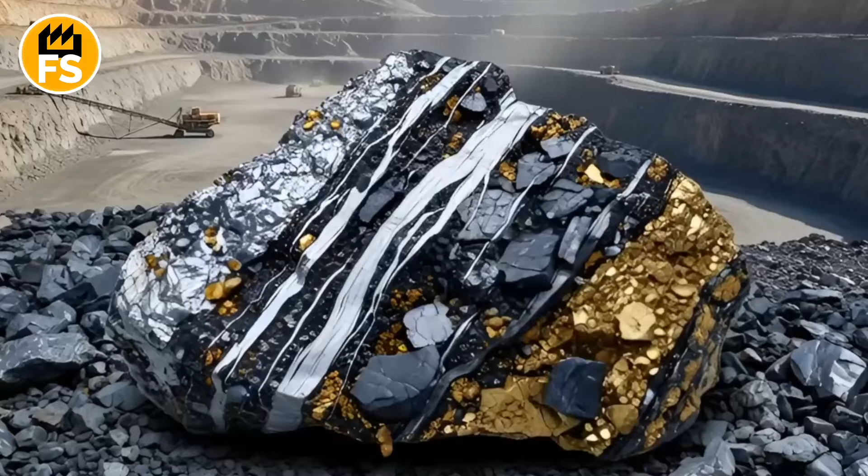What if the metal that still powers most cars on the planet has been quietly poisoning people since the days of the Roman Empire? And we found out too late. Lead built aqueducts, adorned the faces of Egyptians, and today hides in billions of lead-acid batteries, without which cars, elevators, and entire cities would grind to a halt.

We'll descend into mines where explosives shatter rock, trace the journey of galena to red-hot furnaces, and discover why this metal simultaneously saves infrastructure and destroys health. Stick around till the end. One fact about lead will forever change how you look at an ordinary battery.

Okay, let's rewind the clock and dive into a story that began long before the first smartphones and even before the invention of the wheel. How did people even learn about lead, this sneaky, two-faced metal? Truth is, nobody knows exactly who or when first discovered lead, because it wasn't officially discovered by a scientist in a lab like many other elements.

Lead is one of those metals that's just always been around humans, and its history is intertwined with the history of civilizations themselves. Picture this: ancient times, way before people learned to work with iron or even copper. They were searching for interesting stones, clay, anything they could use. And then, in certain places, especially where there are ore deposits, they stumbled upon a really unusual stone.

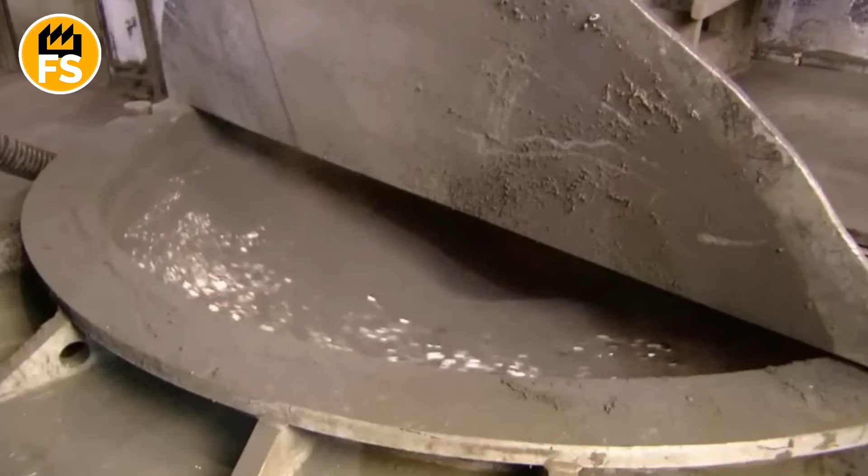Lead has an incredibly low melting point, just 621 degrees Fahrenheit. This means you didn't need some super high-tech furnace to melt it down. A good hot campfire was enough, and if there happened to be lead ore nearby, shiny liquid metal could literally just melt right out of it. The metal in the ore heats up, melts, and starts flowing out of the rock, forming little shiny puddles or droplets. This must have been absolutely mind-blowing to witness.

Out of stone, without any tools, just from fire alone, this shiny, heavy, soft material appears that you can shape with your hands. You could easily flatten it, bend it, cut it even with primitive tools. It wouldn't break like stone. This made it perfect for crafting simple objects.

Archaeological findings show that lead was used as far back as 7,000 or 8,000 years ago, dating to the Neolithic period, for example, in Turkey. People found beads and other small lead objects there. In Mesopotamia, Egypt, and later in Greece and Rome, lead became widespread due to its availability and ease of working with. The Romans built their famous aqueducts and water supply systems using lead pipes. The word plumbing comes from the Latin plumbum, which means lead.

Ancient Egyptians used lead sulfide for eye makeup, while Romans used it for skin lightening and in paints. Nobody back then, of course, suspected this metal was toxic. After all, lead poisoning symptoms were often chronic, developed slowly, and could easily be blamed on bad luck, other illnesses, or curses. People just saw a shiny, useful metal that was easy to work with, and they actively used it, never suspecting that beneath its appeal lurked a treacherous enemy.

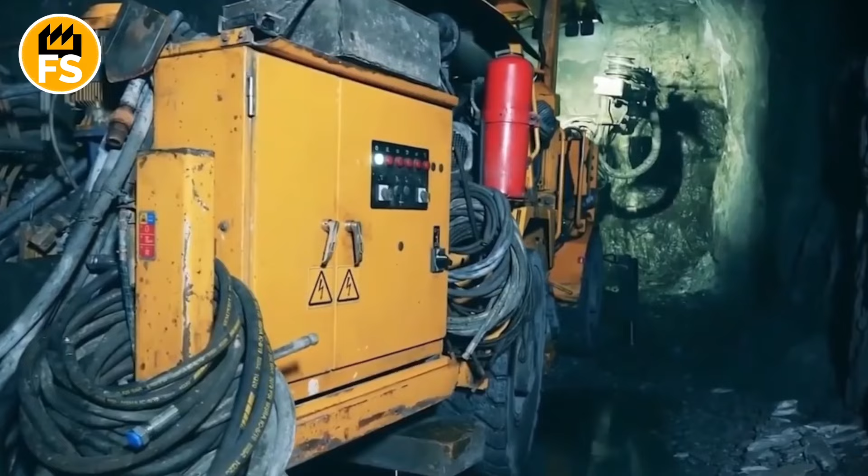Now that we know the grim history of lead's discovery, let's fast forward to our time. Despite all its toxicity and the massive campaign to phase it out, lead is still part of modern industry. But how is it mined now, and where does it hide when we're so desperate to get rid of it? This is a story about precision, control, and the constant battle against its poisonous nature.

Lead, like its neighbor zinc, is rarely found in its pure form. It's mostly extracted from ores, where it exists as lead sulfide, known as galena. And, as you might have already guessed, this anti-hero often shares its deposits with zinc, as well as other valuable metals like silver and copper.

The world's top lead producers are China, Australia, the United States, and Peru, which once again overlaps with the geography of zinc mining. The extraction process starts with locating ore bodies. Geologists, armed with cutting-edge technology, scan the ground and conduct exploratory drilling to find spots where galena concentrations make economic sense. Once a deposit is identified, mining operations begin.

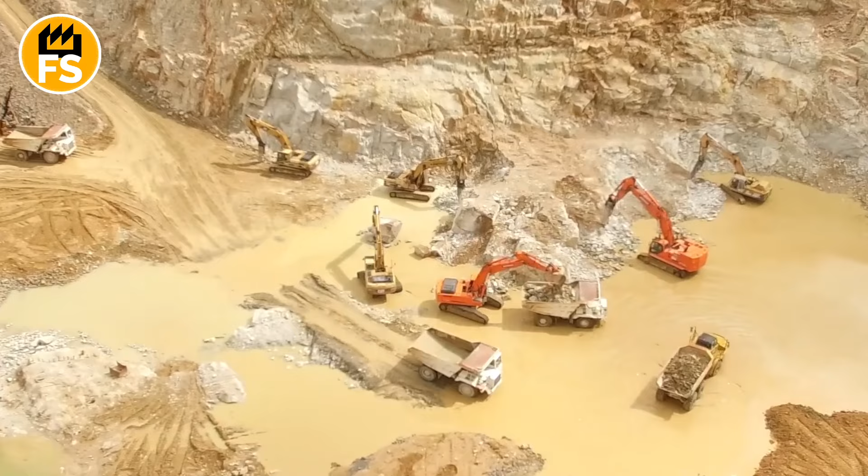This can either be an open pit mine, where massive excavators strip away the top layers of earth, gradually working their way down to the ore, or an underground mine, where miles of tunnels are drilled, penetrating deep into the Earth's crust. In underground mines, drilling rigs are used to create holes in the rock, which are then packed with explosives. After controlled blasts that break up the ore vein, specialized loaders gather the ore fragments and haul them to the hoisting shafts. Ventilation systems run at full capacity, removing dust and pumping fresh air down into the depths.

All the ore is brought to the surface, where it begins its long journey to becoming a metal ingot. After crushing, the flotation process kicks in. This is a chemical-physical method that separates different minerals. The crushed ore is mixed with water and special reagents in massive tanks. These reagents selectively attach to galena particles, making them water repellent. Then air is pumped through the mixture, creating bubbles that the lead mineral particles cling to and rise to the surface as foam. This foam is collected, forming lead concentrate. The waste rock settles at the bottom and gets disposed of.

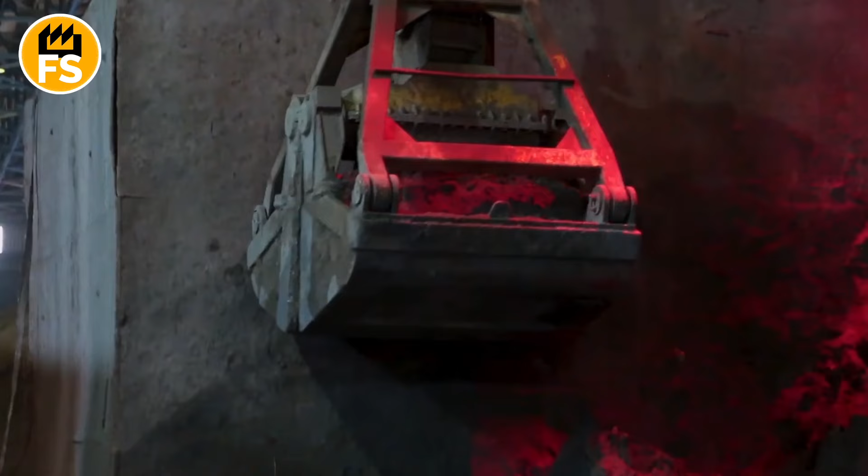Since lead and zinc are often found together, different reagents and flotation cycles can be used to separate them individually, which requires high precision and chemical control. The resulting lead concentrate, now containing a much higher percentage of lead, is shipped to the metallurgical plant. This is where it transforms into pure metal. The most common method is pyrometallurgy, which involves several stages.

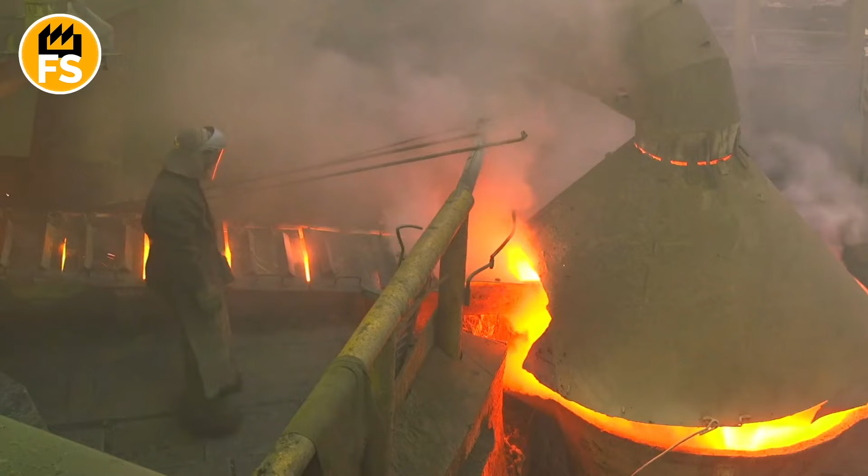First, the concentrate is roasted in special furnaces at high temperatures. This is a calcination process that removes sulfur from galena, converting it into lead oxide. The sulfur that's released as sulfur dioxide gas is carefully captured and converted into sulfuric acid to prevent air pollution. Then the lead oxide is loaded into large blast furnaces, where it's mixed with coke and fluxes. In these furnaces, at temperatures over 2,000 degrees Fahrenheit, a reduction process takes place. The carbon from the coke pulls oxygen away from the lead oxide, releasing liquid metallic lead.

The molten lead, which is extremely heavy, settles to the bottom of the furnace. On top, a layer of slag forms. That's the melted impurities. Molten lead is periodically drained from the furnace, but this isn't pure lead yet. It contains impurities of other metals, such as copper, silver, gold, bismuth, and nickel. That's why lead goes through one more stage, refining. This could be heating to specific temperatures to remove impurities, or electrolytic refining, where electric current separates lead from other metals, achieving very high purity. It's at this stage that valuable byproduct metals like silver and gold, which accumulate in lead ores, are extracted.

So where is all this carefully mined and refined lead being used today, now that we know about its dangers? The biggest consumer of lead, accounting for about 85% of all global consumption, is the production of lead-acid batteries. These are the same batteries that start the engines in nearly every car on the road, and they're also used in uninterruptible power supplies, backup power for telecom networks, and large-scale energy storage systems. In electric vehicles, even though the main battery is lithium-ion, there's often still a small 12-volt lead-acid battery to power the onboard electronics. This is a massive market that keeps demand for lead rock solid.

Every year, over 500,000 bridges are built worldwide, but only a few of them challenge nature and time. To create a giant capable of withstanding thousands of tons of steel, windstorms, and earthquakes, engineers first dive into the very heart of the Earth, drilling the ground to a depth of over 100 meters, studying every layer of rock. Here, under water and mud, the foundation is born, on which the fate of the entire structure depends. How do machines weighing as much as houses place piles with millimeter precision? And what will happen if even one of them shifts? Watch until the end, and you will learn what the engineering elite keeps silent about.

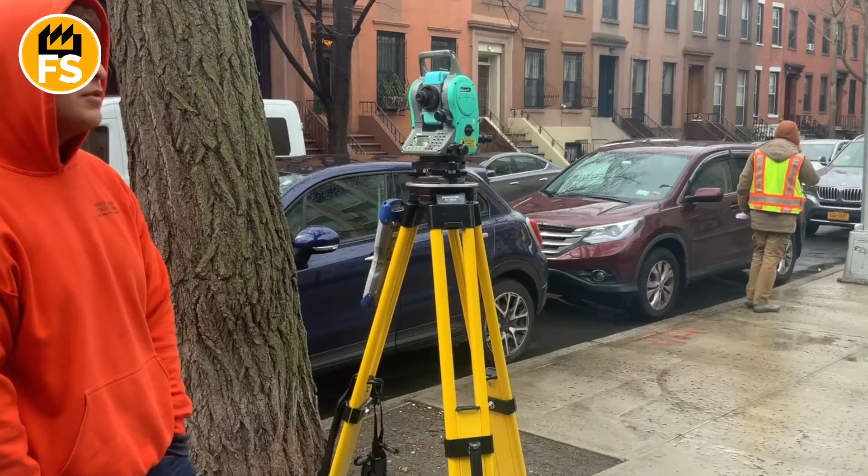The construction of long bridges begins long before the first steel beams or concrete supports appear. It all starts with a site investigation. Engineers analyze the soil, the strength of the current, the level of seismic activity, and the depth of the bottom if it's a river or a bay. Often, special drilling rigs are used to take rock samples at depths of over 300 feet. These data determine the type of the future bridge: suspension, cable stayed, or beam. After this, a three-dimensional model is created.

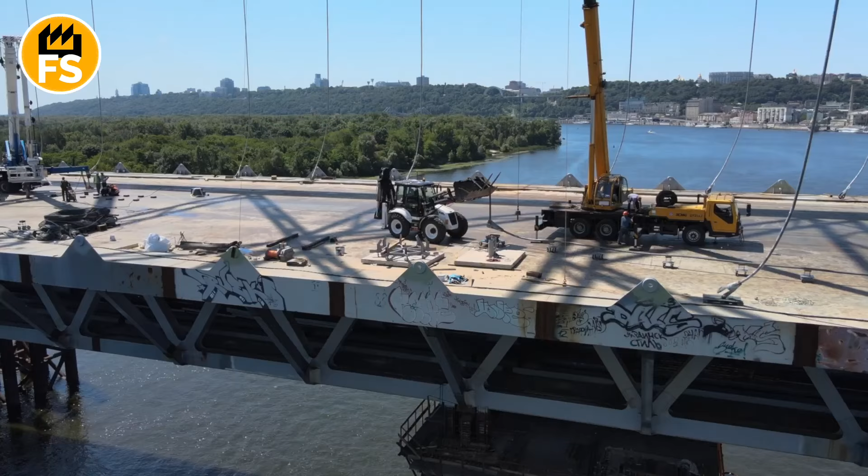It takes everything into account: the load from transport, the force of the wind, temperature fluctuations, and even the possible impact of waves during storms. For bridges longer than half a mile, the permissible error in calculations can be no more than a few millimeters. Otherwise, the structure may lose stability.

When the construction of a bridge moves from drawings to the actual ground, one of the most responsible and complex stages begins: the construction of the foundation, or the pile foundation. It is these structures, hidden under water or earth, that support the weight of the entire bridge: thousands of tons of steel, concrete, transport, and even wind load.

Drilling cranes arrive at the site, giant machines with a long mast, a hydraulic drive, and interchangeable drills. They can reach the height of a 3-story building. Steel piles are brought to the worksite. Usually these are pipes with a diameter from 3 to 6 feet and a length of up to 100 feet. In marshy or marine areas, the piles are even larger, sometimes up to 150 feet.

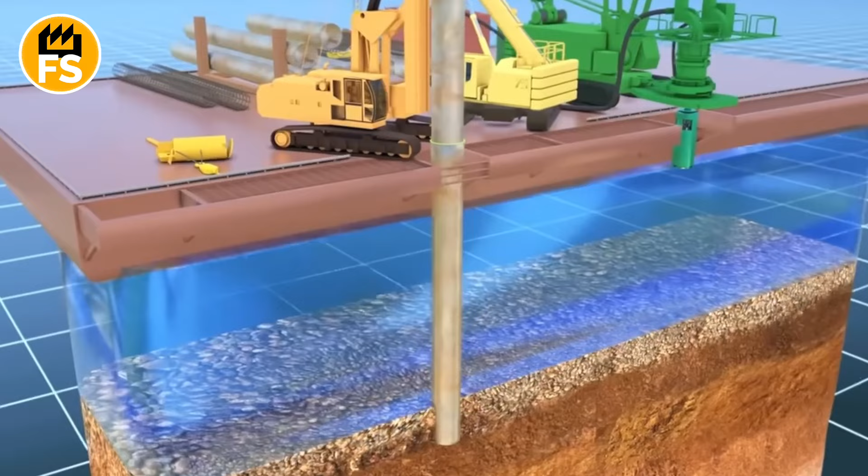The drilling process takes place in stages. The machine is positioned with an accuracy of a few inches. For this, laser and GPS systems are used. Then the operator lowers the drill into the ground. The powerful rotation of the bit crushes the rock, and a hydraulic system pumps out the resulting pulp. In some areas where the soil is unstable, drilling is carried out with the immersion of casing pipes, metal casings that prevent the walls of the well from collapsing.

When the hole reaches the specified depth, a steel pipe, the pile casing, is installed in it. A reinforcing cage is lowered inside, which strengthens the structure, after which concreting under pressure begins. Through a special hose, a concrete mixture is supplied from the bottom up, displacing water or mud. Thus, a dense, air-free mass is formed, which over time hardens into a monolith.

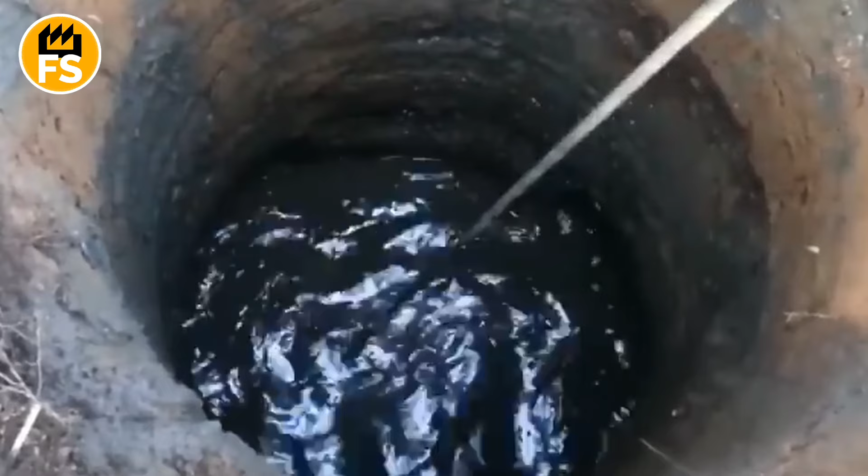In marine areas, floating barges with drilling rigs are used. Divers control the position of the pile underwater, and engineers monitor the process with ultrasonic sensors. In a strong current, drilling is carried out only during periods of calm, when the wave level is minimal.

When the piles are installed, their tops are cut to the required height, and caps are mounted on them: large concrete blocks that unite several piles into one support. After this, pylons or columns are erected on these foundations, which are already visible above the surface.

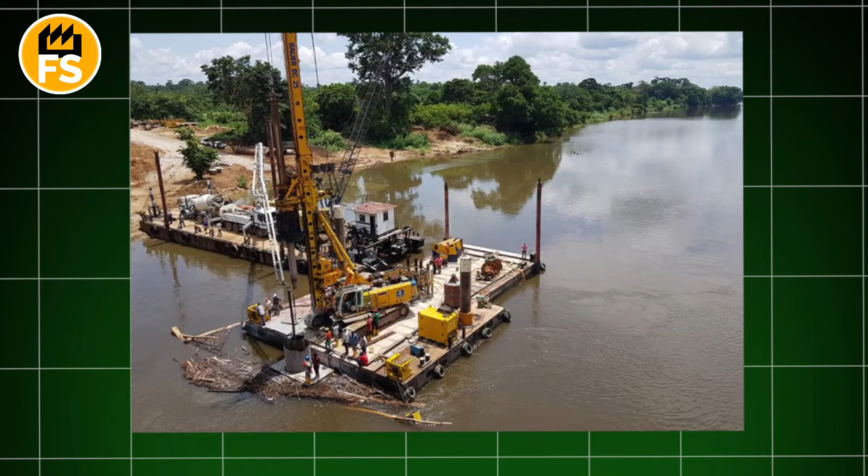On land, temporary sites are simultaneously set up. These are logistics centers where beams, cables, reinforcement, and concrete sections are stored. Often, huge cranes 300 feet high are used here, which can lift blocks weighing over 200 tons.

When the supports are ready, the turn of the superstructure comes. For bridges of great length, two main technologies are used: suspension and cable-stayed. In a suspension bridge, the main load is carried by steel cables. To secure them, two massive towers, pylons, are first erected. Their height can reach 700 feet, as in the Golden Gate Bridge in San Francisco. The towers are assembled in sections, lifting each one with a crane and connecting them with bolts and welding.

After the installation of the pylons, the main cables are stretched between them. This is a complex process that is carried out in stages. Thin steel wires, the thickness of a finger, are stretched one by one by the hundreds, until a main cable several feet thick is formed. Then vertical hangers are attached to these cables. They will hold the roadbed.

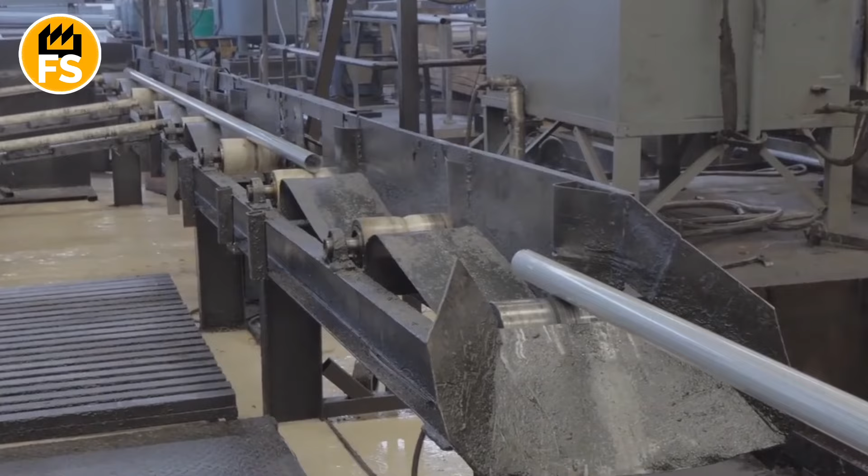In cable-stayed bridges, the main load is transmitted through inclined cables that go directly from the towers to the sections of the roadway. Such cables are made of steel strands with a polymer coating, capable of withstanding a load of over 500 tons. They are installed with the help of hydraulic winches, which precisely regulate the tension.

The installation of the span sections is one of the most impressive stages in the construction of a bridge, when the giant engineering structure literally begins to connect the shores. Each section is a finished fragment of the road, made of high-strength concrete or steel at a specialized plant. There they are formed in giant molds, reinforced with steel bars, treated in thermal chambers for rapid strength gain, and then marked and checked for accuracy with a laser system. After this, these blocks are transported to the construction site.

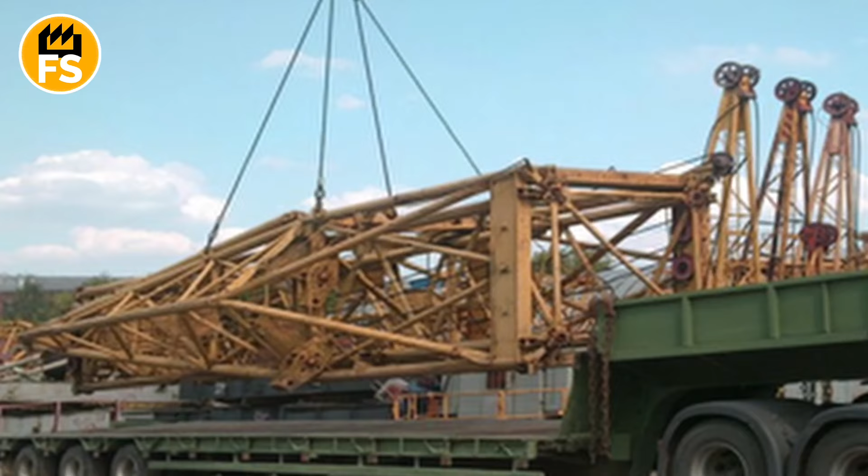If the bridge is laid across a body of water, the sections are delivered by barges, floating platforms capable of withstanding hundreds of tons. On land, they are transported by multi-axle trailers with dozens of wheels, which evenly distribute the weight. The movement of such columns is usually accompanied by police, as each block can be from 100 to 400 tons and over 100 feet long.

At the construction site, floating cranes or lifters are already waiting. These are powerful lifting systems capable of lifting a load of over 500 tons. Most often, such cranes are mounted on pontoons or mobile platforms that can accurately maneuver over the water. During the lift, the crane operator coordinates his actions with the engineers who are on the bridge supports. Every movement is a matter of inch precision, as the section needs not just to be lifted, but placed perfectly in the design position.

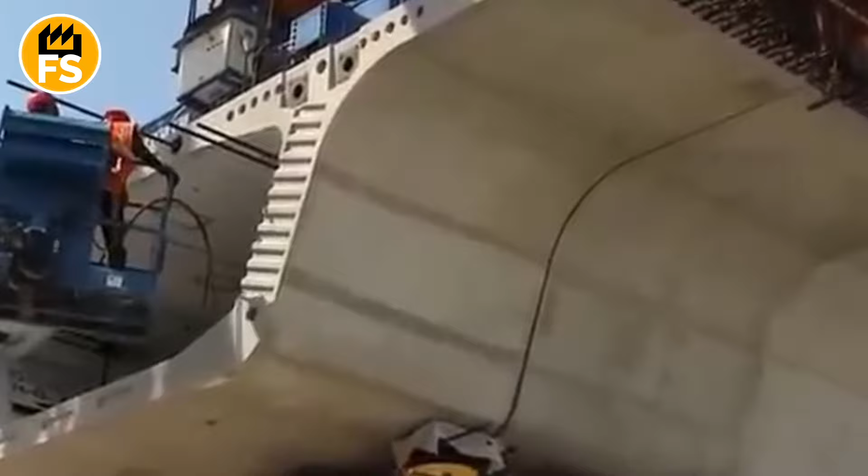When the block is suspended above the supports, it is slowly lowered. Workers fix the position with the help of special guide pins and laser marks. Then dampers and high-strength connecting bolts are installed in the joints of the sections. It is important that the sections fit together without the slightest misalignment. Even an error of half an inch can cause uneven load.

Next, the joints are filled with cement mortar under pressure, which fills all the voids and forms a monolithic connection. In some types of bridges, post-tensioning cables are used, steel strands that are threaded through the internal channels of the sections and tensioned with hydraulic jacks, providing additional strength.

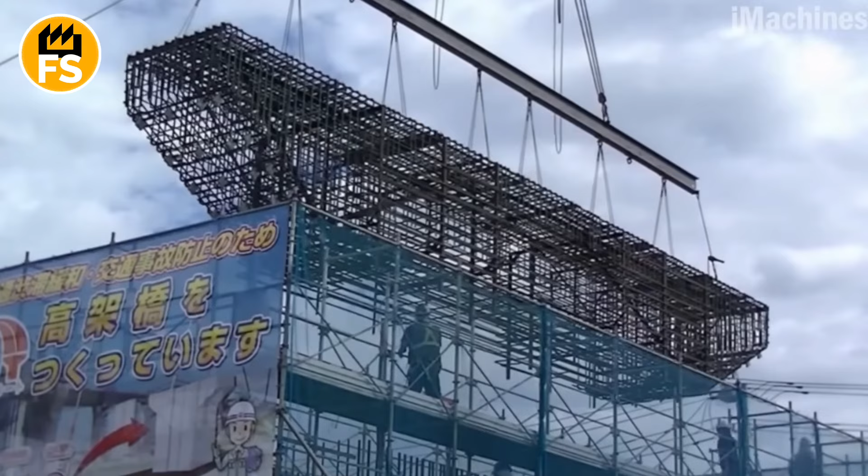If the bridge is being built over the sea, the installation is even more complicated. Barges with sections are tied to positions with an accuracy of a few feet using GPS, and the lifting takes place only in calm seas. Often at night, when the wind is weaker and the waves are minimal, the crane slowly lifts a section. The process can take several hours.

From the side, it looks like a giant aerial operation. A steel or concrete slab, as huge as a two-story building, smoothly rises above the water or a gorge, moving with an accuracy of a few centimeters. When it is fixed between the supports, the bridge literally grows. Another span, another few tens of feet of road, which bring it closer to completion.

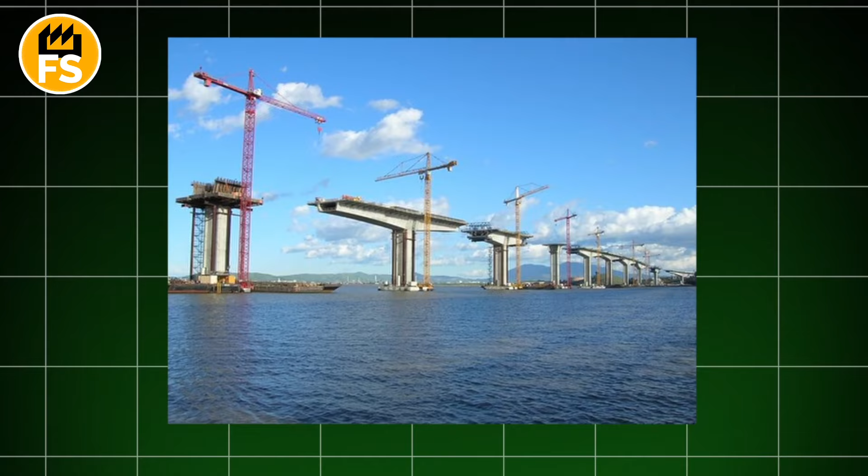In parallel with the installation of the roadbed, communications are laid: lighting systems, communication wires, pipes for rainwater drainage. Most bridges have sensors that measure vibrations, temperature, the tension of the cables, and even the concentration of salts in the air. These data are constantly transmitted to a control center.

When the main structure is completed, the road surface work begins. The surface consists of several layers. The first layer is a special anti-corrosion compound that protects the concrete and metal. Next, waterproofing is applied, then several layers of asphalt or polymer concrete, about 4 inches thick. For suspension bridges, lighter materials are used to reduce the load.

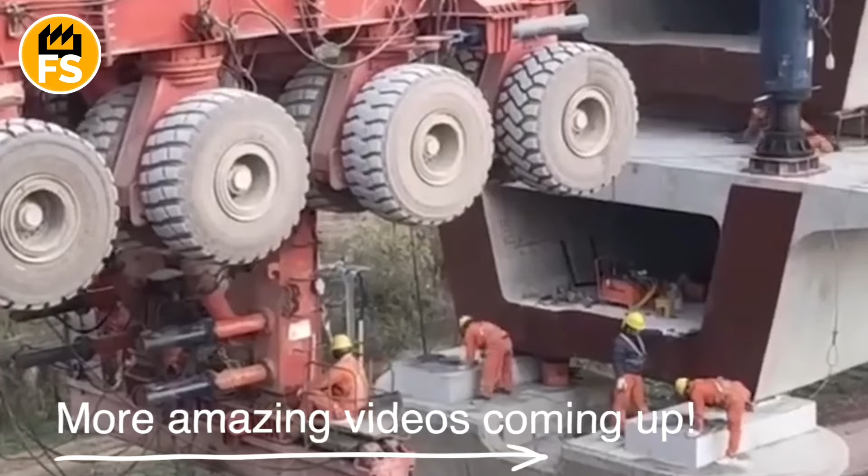The final stage is the installation of railings, noise barriers, and the painting of steel elements. The painting has not only an aesthetic function, it also protects the metal from corrosion. For bridges over the sea, paints with the addition of zinc are used, which create a stable protective layer.

After the completion of all work, the bridge undergoes a series of tests. Special trucks are loaded onto it to check how the structure reacts to weight. Vibration tests are also conducted. Engineers check how the bridge behaves during wind or the movement of trains and cars. If the indicators meet the standards, the object is put into operation.

Imagine, you throw away an old washing machine, not even suspecting that it could live another life. But where does your appliance actually end up after it's been taken away at a discount or for free? Is it really recycled? Or just buried under a layer of earth? Behind every seemingly dead machine stands a whole industry of destruction, separation, and material revival.

Giant shredders, magnetic separators, eddy current fields that separate aluminum from steel with centimeter precision. And at the end of the video, you'll learn something that's not mentioned in any trade-in advertisement. What really happens to your old appliance after it disappears from your home?

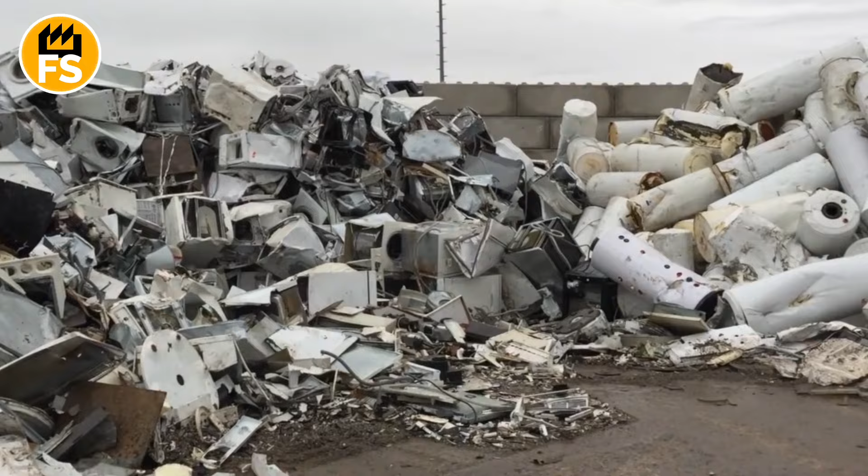Many major brands and electronic stores offer a trade-in program or free removal of old appliances when you buy a new one. For example, in the United States, companies like Whirlpool, LG, and Samsung have such programs, and in Europe, initiatives like the Waste Electrical and Electronic Equipment Directive are in place. The terms can vary. Some companies simply take the appliance, while others offer a discount on a new purchase.

Whirlpool in the United States might offer a $50 to $100 discount on a new appliance for an old washing machine. LG and Samsung sometimes offer $100 or $200 as part of promotional programs. In Europe, some programs allow you to get up to 10% off a new appliance. But more often than not, the discounts aren't very large. Most companies view this as an environmental initiative rather than a way to attract customers.

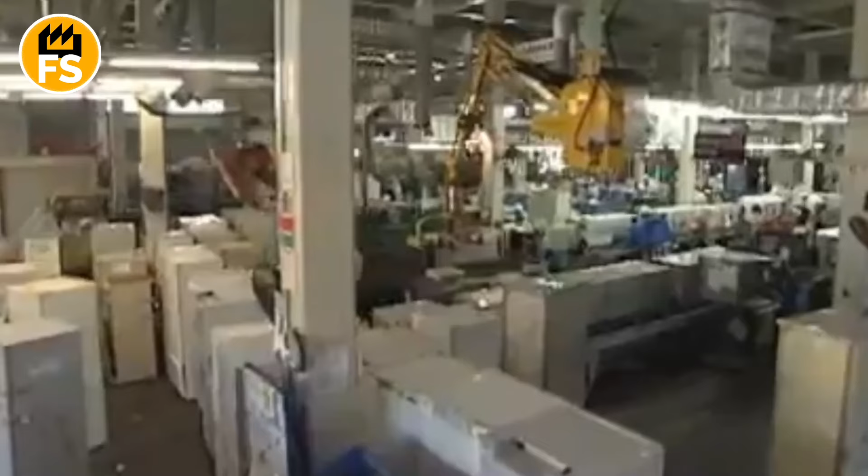In many cities, there are electronic waste collection centers where citizens can bring old washing machines themselves. Often these centers work in cooperation with municipalities or private companies. In some countries, including Germany, the United Kingdom, and the United States, there are municipal services that provide collection services for large electrical appliances. For example, in New York City, you can order a free pickup through the NYC Safe

Disposal program. Some companies are involved in secondary metal recycling, so they may buy the washing machine or take it for free. They send the appliance for dismantling, where they extract metal, electronics, and plastic.

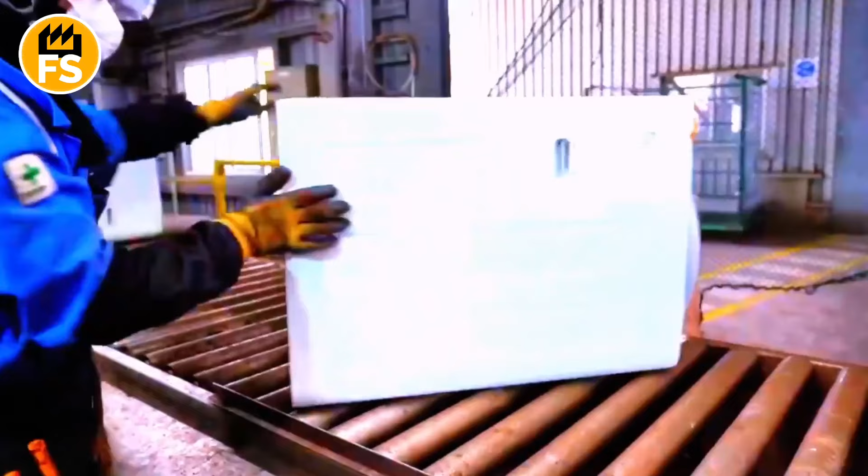First, the machines are sorted into categories: working, partially working, and non-working. Working ones can be repaired and resold, while those beyond repair go to dismantling. Dismantling begins with removing the outer panels, doors, and drum. The motors, electronics, wires, and pumps are separated, as they can be reused or melted down.

Metals are sorted separately: stainless steel, aluminum, and copper. Plastic parts are also sent for secondary recycling. This process can be done both manually and with the help of special automated lines that shred the casing and separate the materials using magnets and air separators.

Automated lines for recycling washing machines consist of several stages, each responsible for separating different materials. First, the machines are fed onto a conveyor belt, where they are shredded by powerful rotary shredders. The blades of these shredders are capable of tearing metal and plastic casings into fragments ranging from 3 to 10 centimeters in size. After shredding, the materials pass through magnetic separators.

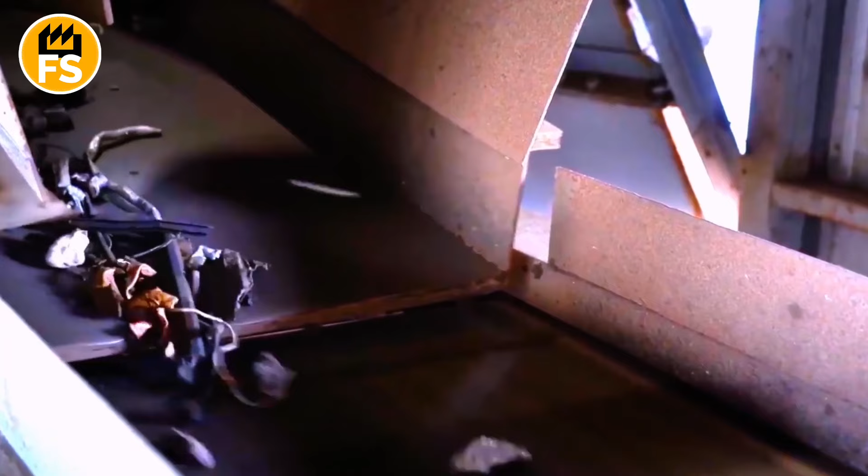They attract ferromagnetic metals, such as steel and cast iron, separating them from the rest of the components. Next, an eddy current separator comes into play, which uses a magnetic field to push out non-ferrous metals, including aluminum and copper.

Plastic and light materials are separated using air separators. Powerful streams of air lift the light particles up, sending them into special containers, while the heavier ones remain on the conveyor. At the end of the sorting line, the remaining materials are additionally checked with optical scanners that analyze their composition and direct them to the appropriate sections for further processing or disposal.

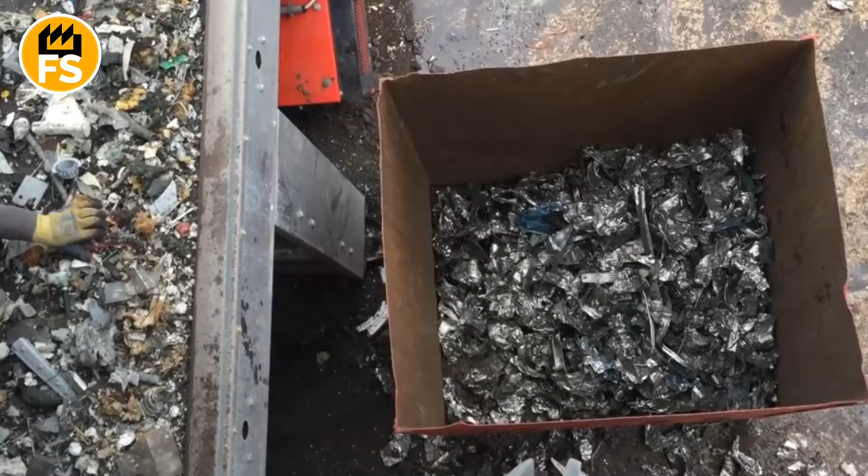After the materials have been sorted using air separators and optical scanners, they go to separate processing lines. Plastic, metal, glass, and other materials are processed for further use or recycling.

The remaining metals, such as steel parts, are sent to metallurgical enterprises for remelting and further use in the production of new goods. Magnetic separators effectively extract iron and steel, which are sent for remelting. Plastic parts are shredded and pressed into briquettes. These briquettes can be sent to specialized enterprises for the production of new plastic products, or for use as secondary raw materials for new technical devices.

If the washing machine has glass elements, for example, doors or windows, they are thoroughly cleaned of any contaminants and can be melted down to produce new glass.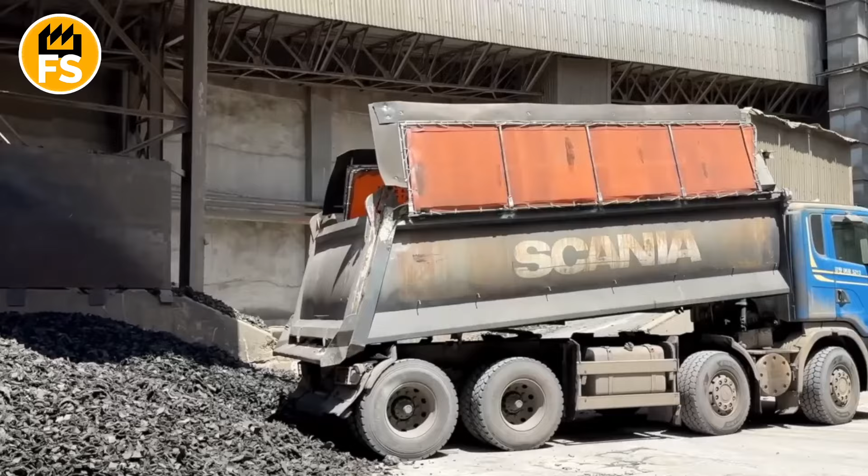The remaining materials that are not recyclable, for example, certain types of rubber or mixtures of materials, are sent for disposal or burial at specialized landfills. Such sorting and recycling lines significantly reduce the amount of waste that ends up in landfills and help return raw materials to the economic cycle.

In some cases, for particularly complex materials, additional technologies are used, such as thermal decomposition or chemical treatment. They are used for materials that cannot be simply separated by mechanical methods, or that require additional processing to prevent contamination or harmful emissions. For example, some plastic components that contain a combination of materials, such as plastic with metal inserts or rubber parts. Such materials may not be subject to simple sorting and require special processing to separate the components.

Often, rubber elements, especially with the addition of chemical compounds, are not effectively recyclable due to their complex structure. For such materials, thermal decomposition or other chemical processes may be used to break them down into simpler components that can be reused or disposed of.

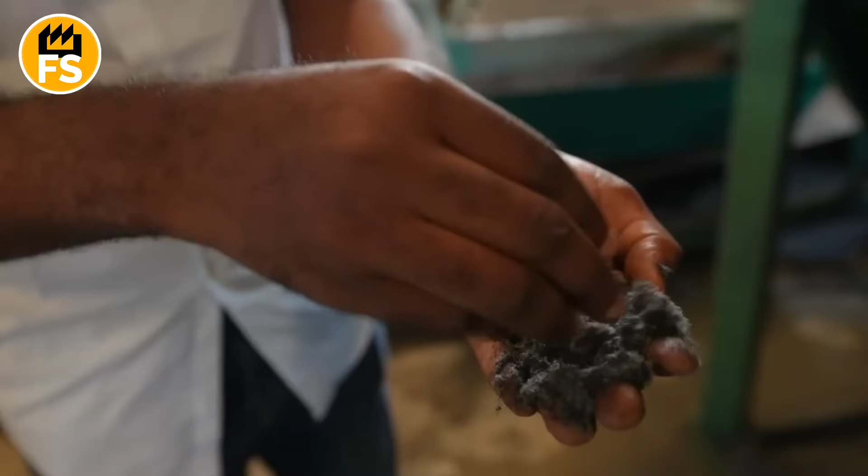In some cases, when an appliance contains toxic substances, for example, mercury in old relays, batteries, or lighting devices, such materials must be processed by special methods. This can be a chemical process that neutralizes harmful components or isolates them for further safe disposal.

Polyurethane or polyester materials, which are often found in wire insulation or in various components of household appliances, can be subjected to thermal decomposition to separate them into simpler components that can be recycled.

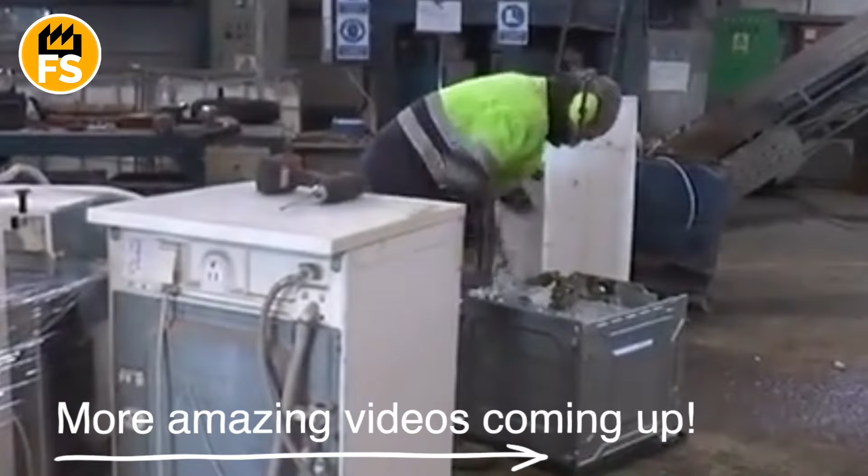In cases where washing machines or other appliances contain complex composite materials that have several layers of different substances, for example, plastic with metal or fibrous components, special processing may be required to separate these layers and for the subsequent recycling of each of them. In general, such technologies are used to ensure maximum efficiency of disposal and to reduce the negative impact on the environment, as improperly processed materials can lead to pollution or the leakage of dangerous substances.

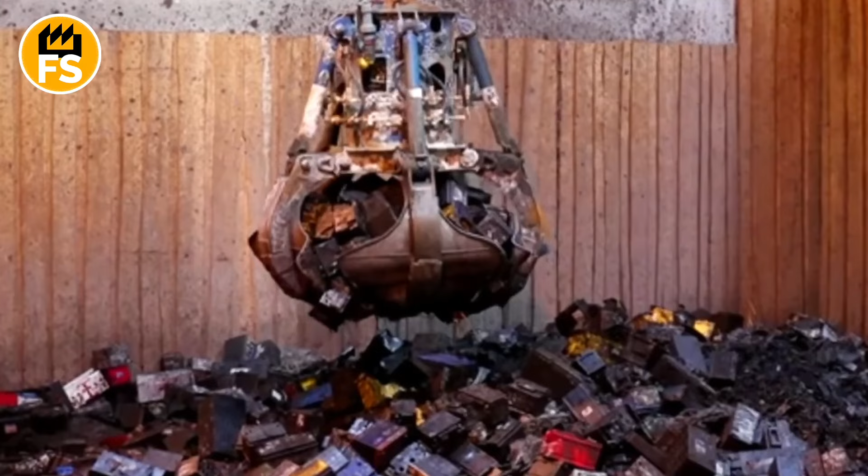Every year, over 50 million tons of batteries are discarded worldwide, from small AA batteries to giant electric vehicle batteries. Imagine a mountain of metal reaching the size of Mount Everest, filled with toxic substances. But now, part of this mountain gets a second life. Behind the thick walls of factories, old batteries are put into shredders where steel blades tear them apart. They are frozen with liquid nitrogen and turned into a black powder that will once again become lithium or cobalt. Watch until the end. You will see how a new future for energy is born from waste.

Battery collection starts with people. Private individuals turn in batteries from phones and laptops. Car service centers, batteries from electric vehicles, and also businesses that use a lot of equipment. Collection points are in electronic stores, supermarkets, or specialized collection centers. Here, everything is as manual as possible. People bring batteries, and staff or volunteers accept and record them.

Old batteries from factories or car service centers are delivered by trucks to large collection centers. Special battery containers have sensors that determine the fill level. When a container is almost full, a signal is sent to the collection company. Some companies use drones to check the fill level of large containers in remote locations.

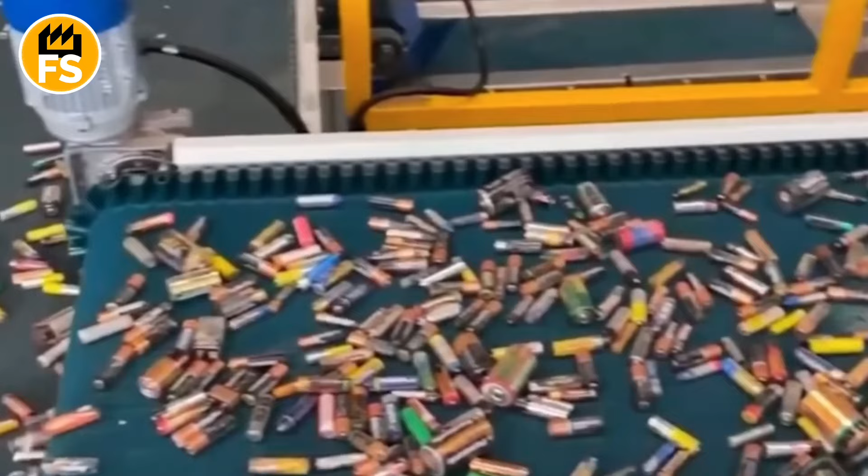Batteries are sorted by type by people and machines, because batteries come in different types: lithium-ion, nickel metal hydride, lead acid, and so on. They cannot be mixed during recycling. At small collection points, for example, in cities, batteries are sorted manually by workers. They rely on markings, labels, and appearance such as shape and case color. Small batteries from smartphones or laptops go in one direction, and large batteries from electric vehicles in another.

At large enterprises, automatic sorting lines are in operation. Machines scan batteries by size, weight, and the type of metals they contain. X-ray analysis or spectroscopy is used to determine exactly which battery is in front of the machine. After scanning, the batteries move along a conveyor to different bins, where they await the next stage.

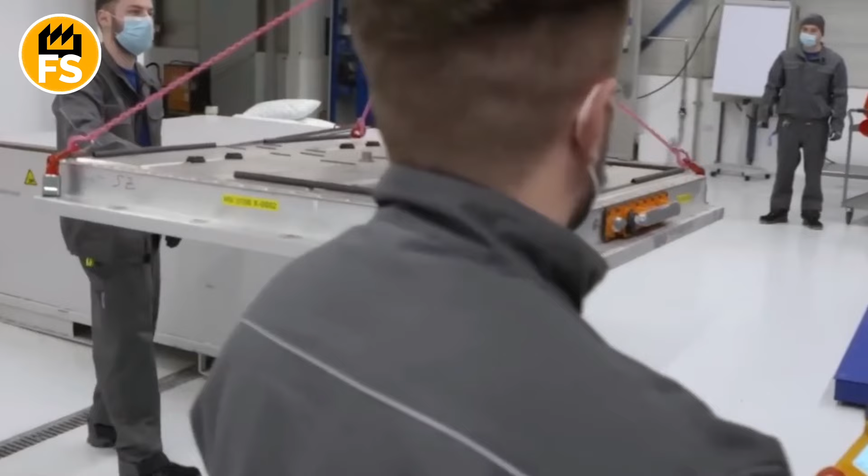Even at automated factories, people are present. Operators check whether the machines are sorting the batteries correctly. If a problem arises, for example, a torn battery case or a missing label, people intervene and sort manually. Batteries from electric vehicles or solar stations are too large for automatic lines. This is where robots come into play, helping to disassemble these giant blocks into smaller sections. Then they are sorted by material.

No matter how much machines do, people are still the most important in the sorting process. These are mainly the workers at collection points and the operators of sorting lines. Specialists assess damaged batteries manually because machines cannot yet recognize all defects. Machines work faster, but for now, they can't do without people. Ultimately, every correctly sorted battery is a chance to recover rare earth metals and reduce environmental harm.

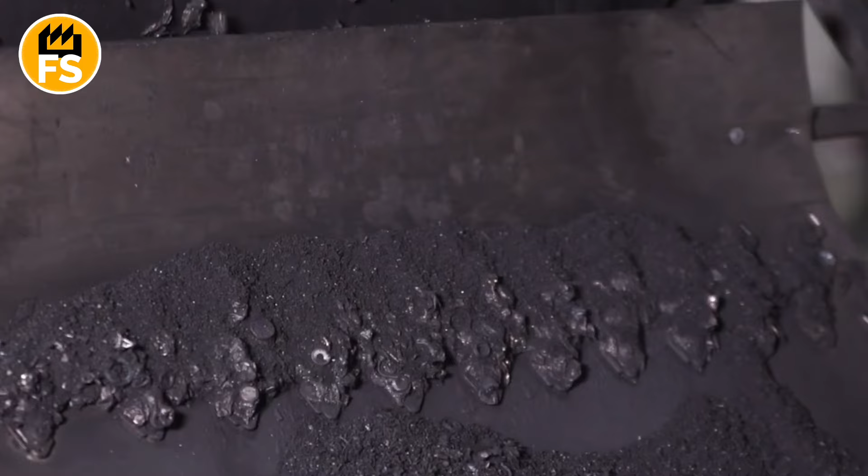Next, the batteries need to be shredded. They enter real metal jaws. The batteries are loaded into a machine that looks like a huge shredder, equipped with steel blades. The blades are so powerful that they can even shred the body of an electric car. Metal chaos ensues. The sound of tearing, grinding, and cracking. The batteries are literally ripped to shreds.

Since the batteries can be charged, they first undergo freezing in liquid nitrogen. This cools the metals and reduces the risk of ignition. Some shredders operate in sealed chambers with inert gases to exclude contact with oxygen. There is also a more spectacular option. In some places, a controlled current is first used for ignition. The battery literally burns out, leaving only the metals. The batteries are shredded into pieces from a few centimeters to a crumb, depending on the type of shredder.

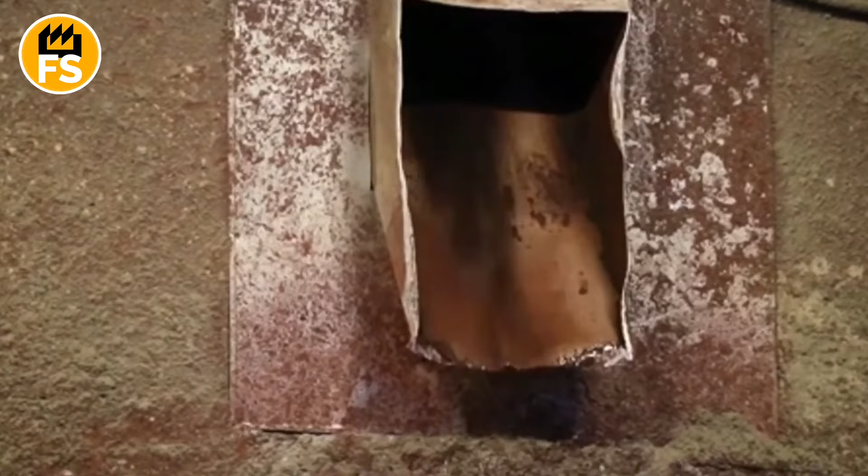The blades rotate at a speed of over 2,000 revolutions per minute, and metal fragments fly in all directions with a clang inside a protected chamber. The shredded pieces pass through magnetic separators, which with filigree precision extract ferromagnetic metals, for example, nickel or cobalt. Fragments of other materials continue their journey along the conveyor.

A fine black powder, known as black mass, settles in special containers. This is where the treasures are hidden: lithium, cobalt, manganese. Machines literally suck up the powder with dust collectors to gather even the microparticles. Residues that are not suitable for recycling, meaning plastic and traces of electrolytes, are washed away with special streams of liquid. At this stage, hydraulic crushers are used, which turn the remnants into a slurry that is easy to filter.

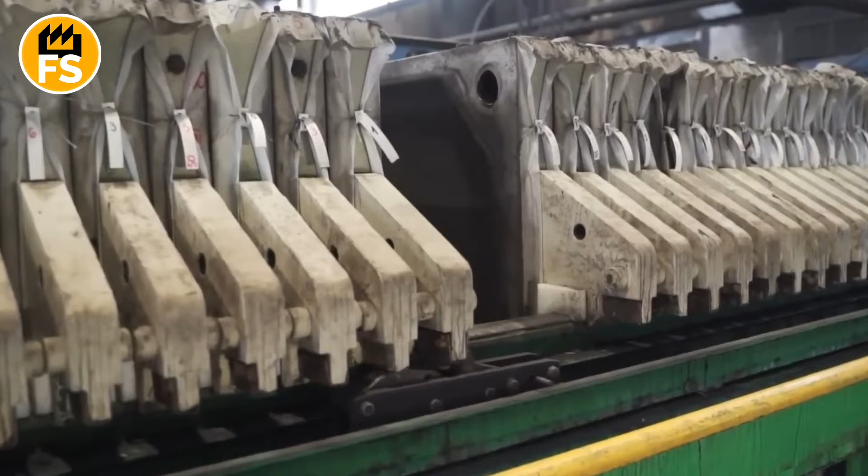Engineers monitor the condition of the shredders and the temperature level inside the chambers. Specialists work with the results of the shredding. They check whether all the metals have been separated and whether any extra impurities remain. If a battery is charged and has defects, it can literally explode during shredding. But the system controls this. The explosion is extinguished by gases, and the process does not stop.

After the batteries are shredded and that precious black powder is obtained, science in action, as they say, begins. The metals that seem to be hidden forever are extracted using two main methods: hydrometallurgy and pyrometallurgy. And although this may sound a bit technical, the processes themselves are extremely interesting. So what does it look like?

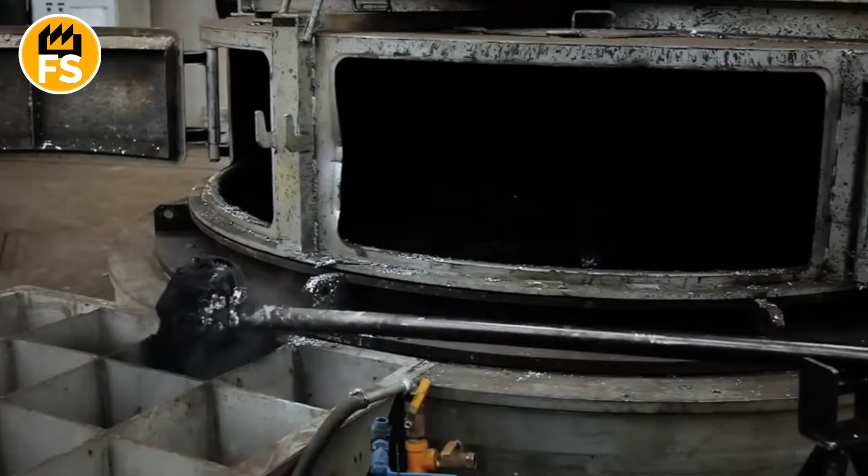Battery fragments are immersed in special acid solutions. There are huge tanks where a yellowish-green liquid is bubbling. This could be sulfuric or hydrochloric acid. During immersion, a reaction occurs. Lithium, cobalt, nickel, and other metals literally dissolve in this soup. To extract the desired metal, a clever trick is used: ion extraction. Special reagents, for example, organic compounds, are added to the liquid, which capture a specific metal, like a magnet. As a result, each metal settles into a separate layer.

When the metals are separated, they are precipitated in the form of salts or hydroxides. They look like small white or colored crystals. For example, lithium precipitates as lithium carbonate, a powder that looks like fine sugar. Cobalt becomes a bright blue precipitate, and nickel, a pale green one.

If hydrometallurgy is a gentle approach, then pyrometallurgy is more like shock therapy for metals. Here, everything literally burns and melts. The black mass is loaded into a huge arc furnace, where the temperature reaches almost 3,000 degrees Fahrenheit. The metals melt into a liquid mass, and the plastic and other residues simply burn up. The metals stratify, like oil and water, but at the temperature of molten lava.

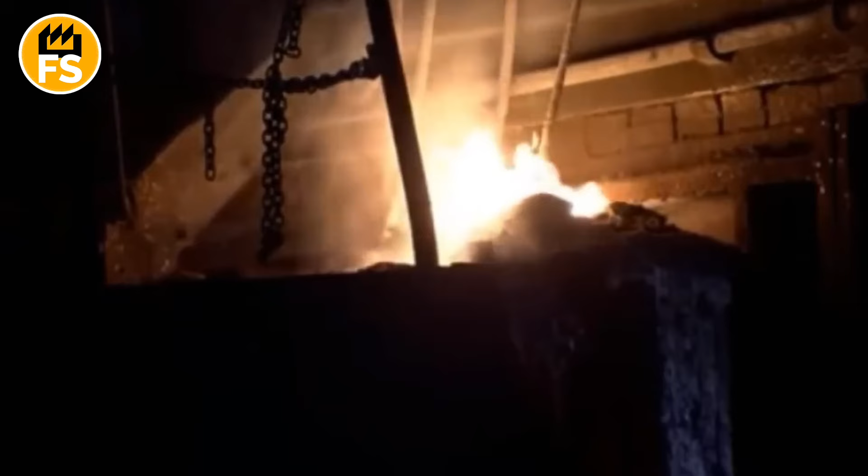Several layers form in the furnace. Heavy metals, meaning cobalt and nickel, settle to the bottom, while lithium remains in the slag. This is the upper, lighter layer. Then this slag is broken up and processed separately to extract the lithium. After cooling, the metals take the form of small ingots, shiny, smooth, and ready for reuse.

The cooling after the pyrometallurgical process usually happens in a controlled manner. After all, if you just let the molten metals cool on their own, it could take hours and sometimes even days. In addition, such cooling can create an uneven metal structure. This will affect the quality of the final product. Therefore, they are usually cooled in special chambers, where the cooling rate can be regulated.

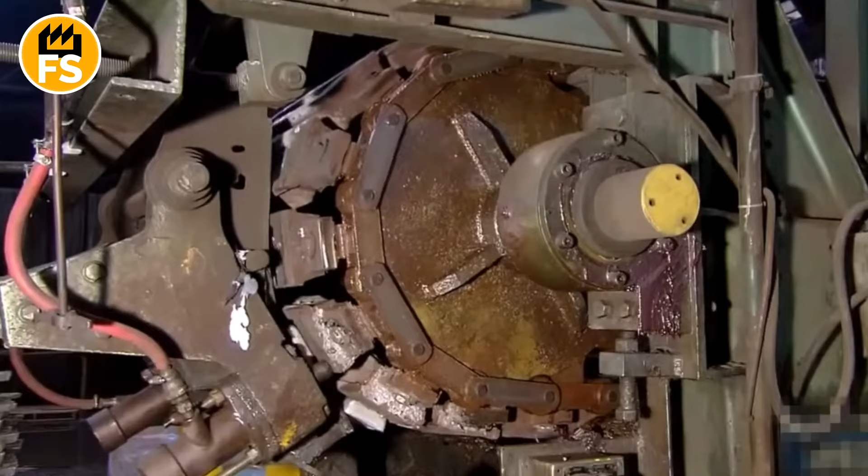If the controlled cooling is air-based, the ingots are left on a conveyor under powerful fans. It's like a giant hairdryer that quickly cools the metal surface. If it's water cooling, for a faster process, the metal ingots can be immersed in a bath of water or special liquids. This is a huge tank where the red-hot ingot, upon entering the water, releases clouds of steam. It looks quite spectacular.

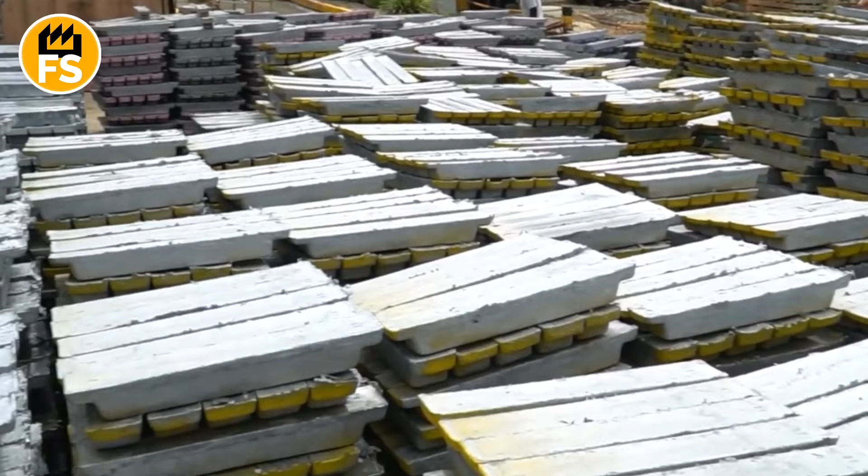Sometimes there is combined cooling. This is when some stages begin with air cooling and then are completed with water cooling to reduce stress in the metal. Controlled cooling ensures a uniform structure of the metals, which is critically important for their reuse in batteries. This reduces cracks or defects that can arise from sharp temperature changes.

The obtained lithium is used to create new batteries, those that will charge electric cars or even your phones. Nickel can become part of turbines that generate energy from wind, and cobalt, an important component of medical equipment. So we are literally closing the loop. Old batteries give life to new technologies.

Discarded batteries can turn into a real environmental disaster. First, they contain toxic substances that pollute the soil and water. Second, the mining of new rare earth metals not only depletes natural resources, but also harms the environment. Recycling solves both of these problems.

You know what else is cool? The more batteries we recycle, the less we depend on mining new materials. This is a direct path to sustainable development.

Despite the popularity of lithium, only 1% of this metal is currently recycled. The main reason is the high cost and complexity of the process. But researchers are developing new technologies that could change the situation in the coming years. Interestingly, even now, electric car manufacturers like Tesla, Volkswagen, and BMW are investing in their own recycling plants to maintain control over valuable materials.

Every year, humanity creates energy that on one hand saves cities, and on the other, hides an incredible story of transformations. One average reactor produces 1,000 megawatts and requires only 27 tons of enriched uranium per year, the weight of 3 school buses. But to get these 27 tons, you have to mine and process over 100,000 tons of ore.

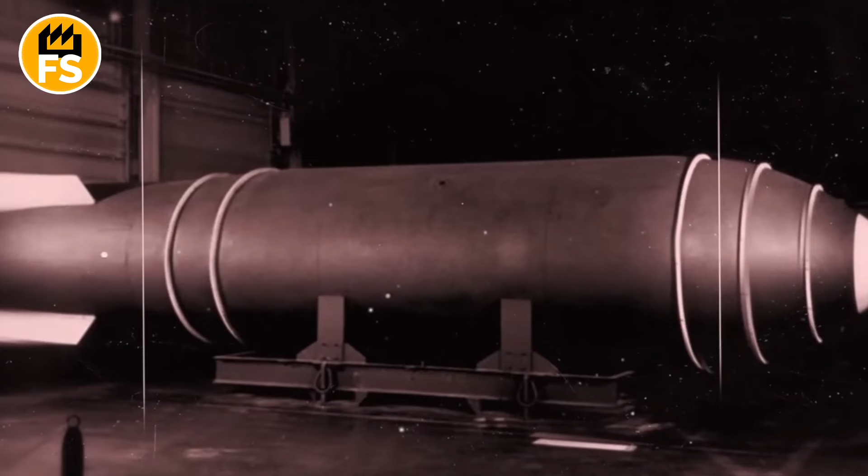In this video, we will follow the path from a noisy mine and acid vats to supersonic centrifuges, furnaces, and tiny fuel pellets. Every step is chemistry, giant machines, and unexpected risks that you are almost never told about. Stay until the end, and I will reveal one secret to you that will change your perception of atomic energy.

An average American nuclear reactor has a capacity of about 1,000 megawatts. For it to operate for 1 year, it needs approximately 27 tons of enriched uranium fuel. 27 tons is the weight of about 3 school buses. And now let's compare. To produce the same amount of electricity, a coal-fired power plant needs to burn over 3 million tons of coal. That's over 10 million barrels of oil.

Nuclear fuel is the highest form of energy concentration that humanity has ever created. But to get these 27 tons of fuel, you need to start with a much, much larger amount of raw material. The chain of transformations is simply staggering. To produce those same 27 tons of enriched uranium fuel, you need to start with 215 tons of uranium concentrate.

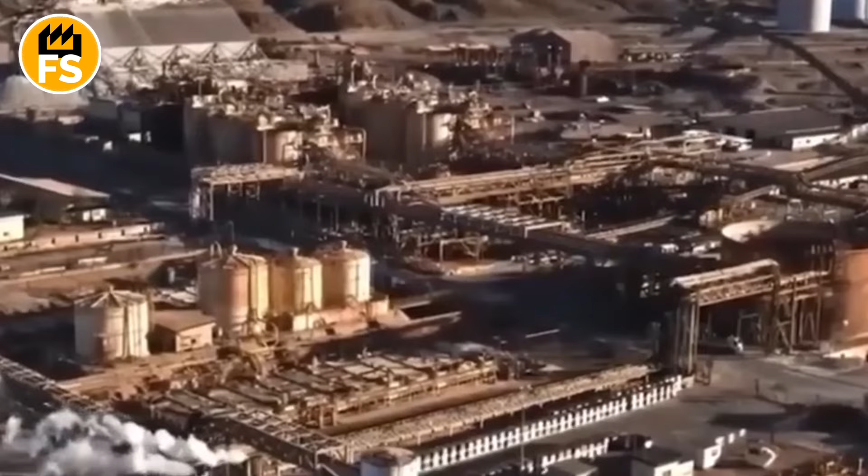And to get those 215 tons of concentrate, you need to mine and process over 100,000 tons of uranium ore. Imagine a giant mountain of stone, the size of a multi-story building, which ultimately turns into a volume of fuel that fits in one truck. This shows how dispersed uranium is in nature and how complex the process of its concentration is.

It all begins in the roaring chaos of a uranium mine. Imagine a deep shaft or a giant open-pit quarry where huge machines with a deafening roar bite into the rock. The air here is thick with dust, and every stone that is brought to the surface looks absolutely ordinary, just a gray, dull granite or sandstone. The uranium here is invisible.

It is dispersed in the rock in the form of tiny microscopic inclusions, and its concentration is incredibly low, often less than 1%. This means that to get 1 pound of uranium, you need to mine and process hundreds or even thousands of pounds of barren rock. Dump trucks, loaded to the brim, take this ore to a nearby processing plant that hums.

The first stop is the primary crusher. This is a giant steel maw that, with a deafening crunch, crushes large stone blocks into pieces the size of a fist. Then, this crushed stone goes by conveyor to a huge mill. A giant rotating drum, filled with steel balls, resembles an industrial washing machine for stones. Here, in a continuous roar, the ore is ground into the finest grey sand, almost dust.

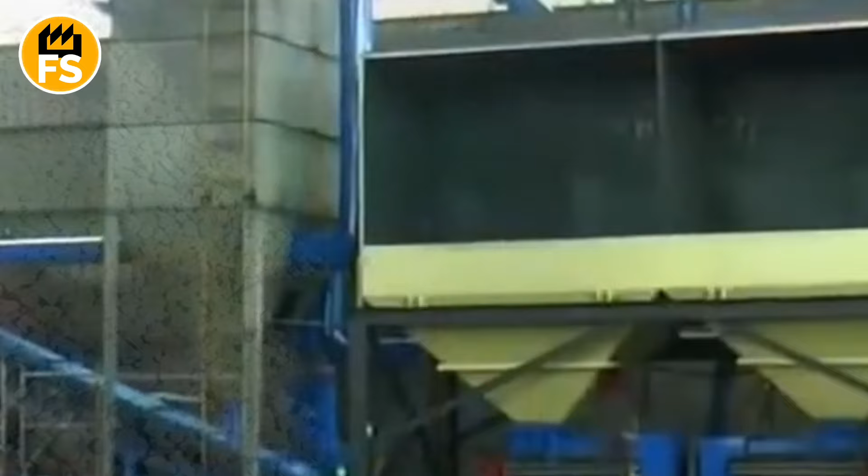And now the real chemistry begins, a process called leaching. This grey sand is mixed with water, forming a thick pulp, and pumped into huge vats the size of a small house. A powerful chemical solvent is added to these vats, most often sulfuric acid. This acid, like a hungry predator, begins to eat the uranium, pulling it out of the solid rock and turning it into a liquid, dissolved state.

This process lasts for many hours, while the entire mixture is continuously stirred. As a result, we get two things. On one hand, tons of wet, now unnecessary sand, so-called tailings, which are toxic waste, and on the other, a murky, greenish-yellow liquid containing our precious uranium. This liquid needs to be cleaned and concentrated.

It is passed through a series of columns filled with special ion exchange resins. Imagine this as a high-tech water filter. The resins, like a magnet, pull out only the uranium ions from the solution, letting everything else pass by. Then these resins are washed with another solution, which washes the concentrated uranium off them.

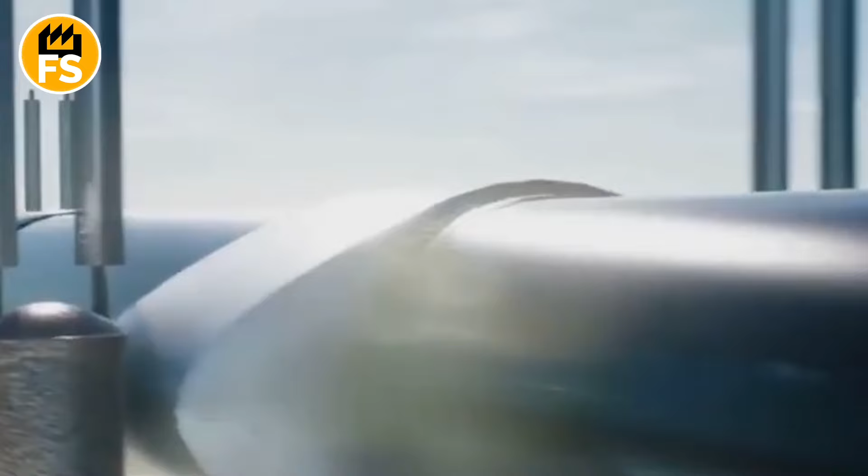And so, finally, our final product is precipitated from this clean, saturated liquid. By adding ammonia or hydrogen peroxide, the uranium is forced to fall out of the solution in the form of a bright yellow, thick precipitate. This precipitate is filtered, dried in furnaces, and at the output, we get the same famous yellow cake, a heavy, radioactive, mustard-like powder. This is the uranium oxide concentrate, the first step on the long path to clean energy.

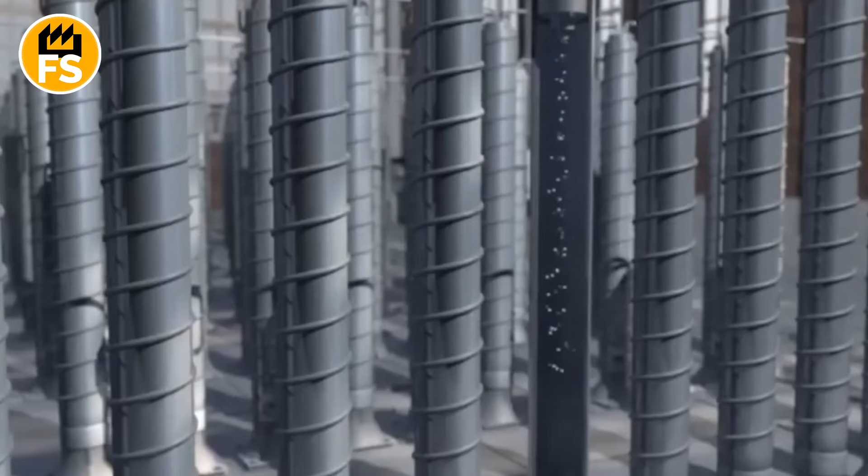The next step is purification to an absolute, almost unearthly purity. The yellow cake is sent to a special plant, where it is dissolved and, with the help of complex chemical processes, such as solvent extraction, all impurities are removed from it. The goal is to obtain perfectly pure uranium dioxide.

But here the main problem arises, which is at the heart of all nuclear energy. In this perfectly pure uranium, 99.3% is the stable, lazy isotope uranium-238, which cannot sustain a chain reaction. And only 0.7% is the energetic, unstable isotope uranium-235, which is our fuel. They are chemical twins, and it is impossible to separate them by chemistry.

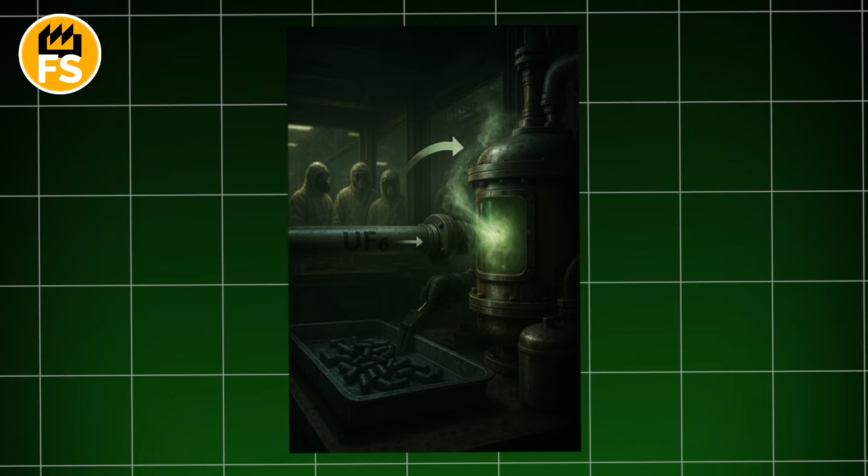To make the reactor work, we need to increase the concentration of this energetic uranium-235 from 0.7% to 3 or 5%. To begin enrichment, the solid uranium must be converted into a gas. It is treated with hydrofluoric acid, turning it into uranium tetrafluoride, and then with fluorine to obtain uranium hexafluoride. This is a very corrosive and dangerous compound, which has a unique property. It becomes a gas at a temperature slightly above room temperature. And so this gas, packed in special containers, is sent to an enrichment plant.

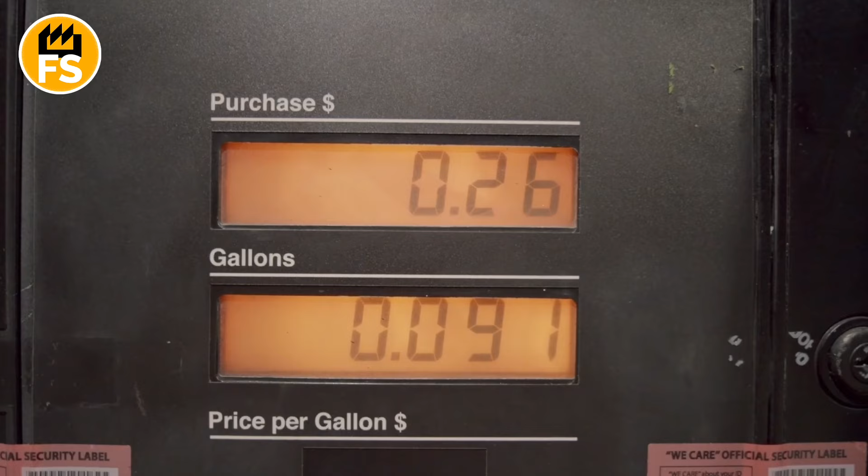Imagine a giant, noisy workshop the size of several football fields, filled with thousands of identical, tall, metal column-like devices. These are gas centrifuges. Each of them is a high-tech top that rotates at supersonic speed, making tens of thousands of revolutions per minute. When our uranium gas is pumped inside, the magic of physics begins. The heavier gas molecules with uranium-238, under the action of centrifugal force, are pressed against the walls of the centrifuge, and the very slightly lighter molecules with uranium-235 remain closer to the center. This is a microscopic difference, but it is enough.

Special tubes take the gas from the center, which now contains a little more uranium-235, and send it to the next centrifuge in the cascade. And the depleted gas from the walls is diverted to the side. To achieve the required concentration of 3 to 5%, the gas must pass through thousands of such centrifuges. This is an incredibly long and energy-intensive process.

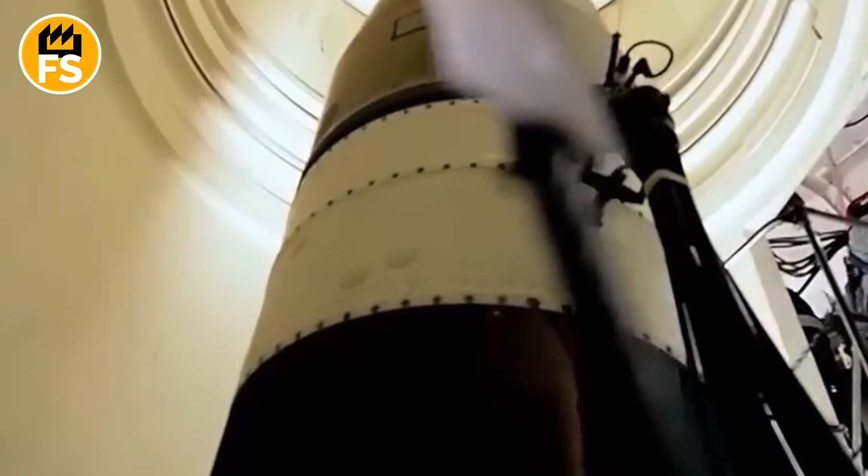When we have finally obtained our uranium hexafluoride, enriched to the required level, it needs to be converted back into a solid material suitable for fuel. With the help of chemical reactions, it is turned into a black powder of uranium dioxide. But this is not just any powder. Each of its particles has a perfectly calibrated size and shape.

Now the most interesting part begins: the creation of fuel pellets. This black, heavy powder is sent to a press. Imagine a high-precision pharmaceutical press, only instead of medicine, it stamps radioactive pellets. It compresses the powder with incredible force, turning it into small, dense, perfectly cylindrical granules, or pellets. They are still brittle, like chalk.

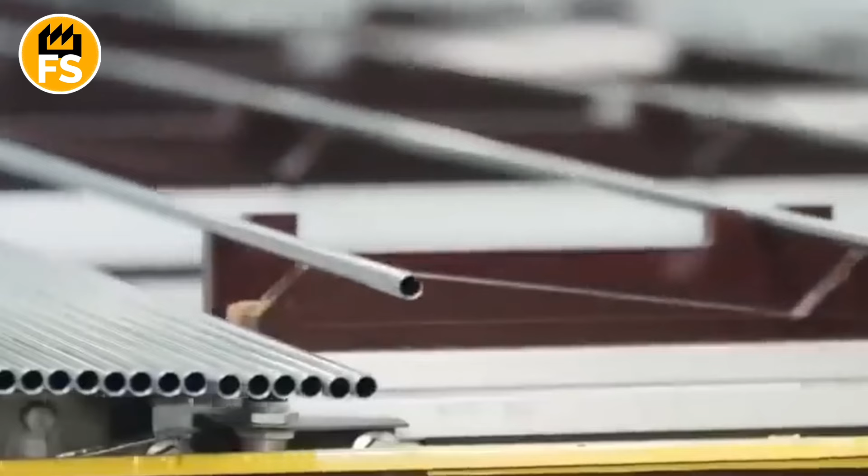To give them strength, they are sent to a furnace. But this is not an ordinary furnace. This is a high-temperature furnace, filled with hydrogen to prevent oxidation. There, at a temperature of over 3,000 degrees Fahrenheit, these pellets are baked for many hours. During this process, called sintering, the powder particles fuse together, and the pellet turns into an extremely hard, dense, ceramic-like substance. It becomes so strong that it can withstand the extreme temperatures and pressures inside a nuclear reactor. Each pellet after this undergoes laser control, which checks its dimensions with micron accuracy.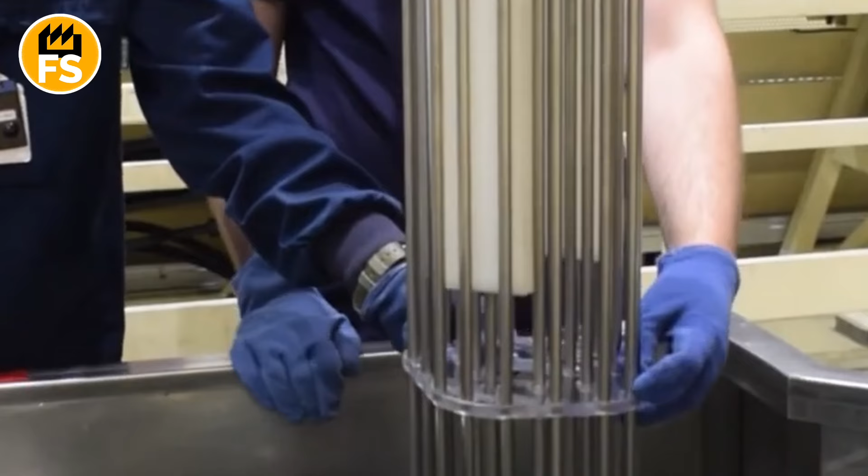The next step is assembly. These small black ceramic candies are carefully, one by one, loaded into long, thin tubes. These tubes, about 13 feet long, are not made of steel, but of a special zirconium alloy called zircaloy. This material is unique in that it is very strong, resistant to corrosion, and most importantly, almost transparent to neutrons, allowing the chain reaction to proceed without hindrance.

When the tube is completely filled with pellets, it is filled with an inert gas, usually helium, to improve heat transfer, and hermetically sealed at both ends. Now, it is not just a tube with pellets, it is a fuel element.

And the final stage is the creation of a fuel assembly. Several hundred such ready-made fuel elements, for example 17 by 17, which gives a total of 289 pieces, are assembled into one large square bundle. They are held together by special spacer grids. This ready-made assembly, which looks like a giant, high-tech quiver with arrows, is the final product. It weighs about half a ton and is ready for shipment to a nuclear power plant.

And so, having passed an incredibly long and complex path from an ordinary stone through chemical transformations, supersonic rotation in centrifuges, infernal baking, and precise, almost clockwork assembly, this concentrated bundle of energy is born, ready to quietly and reliably produce millions of kilowatts of clean electricity for several years.

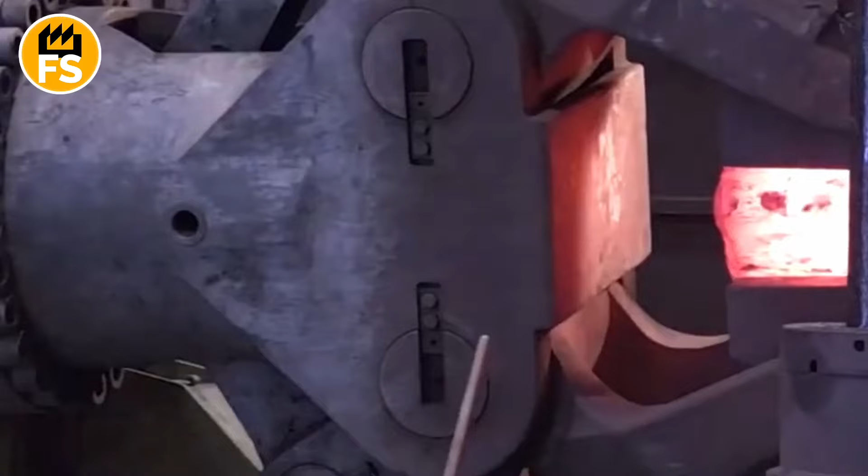Imagine this. In the heart of the ocean depths, or in the roar of an airplane turbine, there is a part that decides everything. A single shaft, capable of transmitting the power of 1,000 Ferraris, or withstanding speeds of over 10,000 revolutions per minute. But how is this steel axis, which can lift a space shuttle, born from an ordinary cold ingot? And what do a ship's propeller, the size of a 3-story building, and the precision of a jeweler, removing a few grams of metal, have in common?

In this video, we will reveal the secret of creating giants, without which neither a ship nor an airplane can move. Watch until the end. A fact that will turn your understanding of the power of metal upside down awaits you.

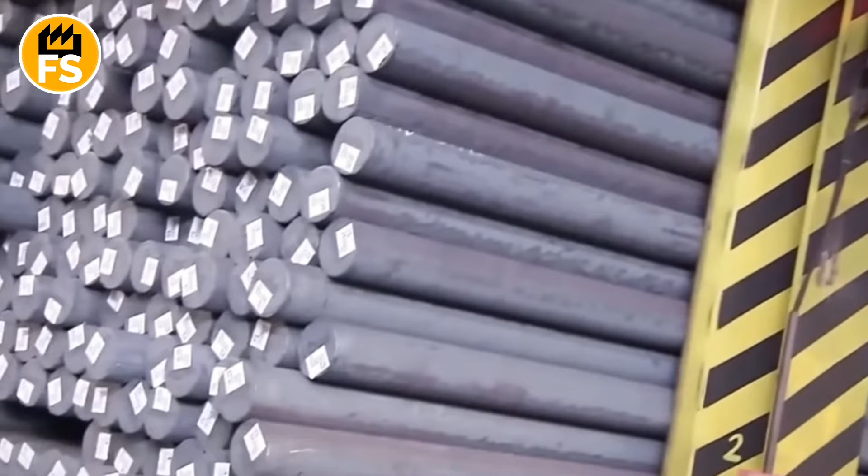A shaft is a steel rod that transmits colossal power from the engine to the propeller. You can't just take any steel for it. Giant, perfectly clean steel ingots, each weighing tens or even hundreds of tons, are brought to the factory. This is not scrap. It is a special vacuum-degassed alloy from which almost all impurities have been removed.

This massive cold cylinder is first sent to a furnace. But this is not a melting furnace. This is a giant heating chamber where, for many hours and sometimes days, the ingot is slowly and uniformly heated to a temperature of about 1,200 degrees Celsius. It becomes dazzlingly yellow, plastic like clay, ready to meet the hammer. And so begins the most brutal and ancient art of metallurgists: forging.

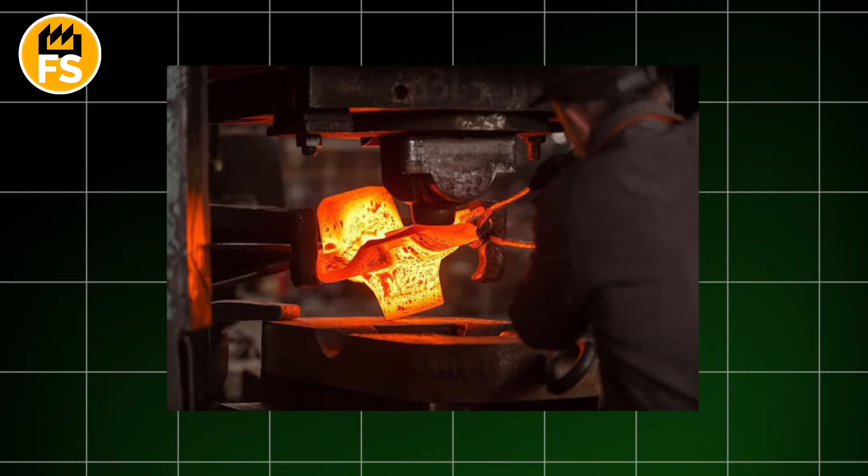A giant crane picks up the red-hot ingot and places it under a hydraulic press hammer. This is a monster capable of dropping its top with a force of tens of thousands of tons, with a deafening, deep boom that makes the ground tremble. The hammer slowly but relentlessly descends onto the red-hot metal. These are not quick strikes. This is a slow, methodical squeezing. After each strike, a manipulator slightly turns the ingot.

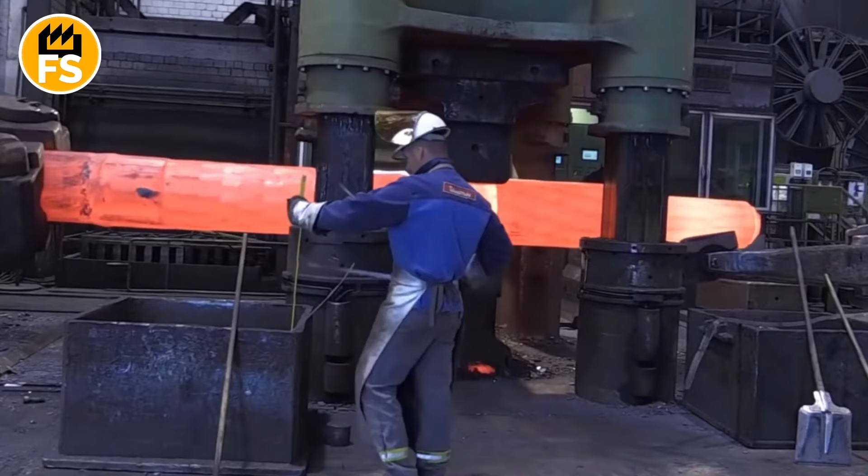And so, strike after strike, hour after hour, the formless cylinder begins to stretch and take the shape of the future shaft. This process does not just change the shape, it does something incredible inside the metal. It compacts its crystalline structure and aligns all the grains of steel in one direction, along the axis of the shaft. It's like turning a scattered pile of straws into a tightly twisted rope. A shaft born in a forge will be many times stronger and more resistant to torsion than a simply cast one.

After the forge, we have a rough, black, scale-covered blank that only vaguely resembles a shaft. It's time for the sculptor. It is secured in a giant lathe. Imagine a lathe half a football field long. The blank begins to rotate slowly, and a cutter of super hard alloy is brought to it.

With a hiss and a screech, it begins to remove layer after layer, turning the black, uneven surface into a perfectly smooth and shiny one. A continuous ribbon of hot, bluish metal shavings, resembling a streamer, comes off the cutter. This process lasts for many days. Computer control ensures accuracy to the hundredths of a millimeter over the entire 30-meter length.

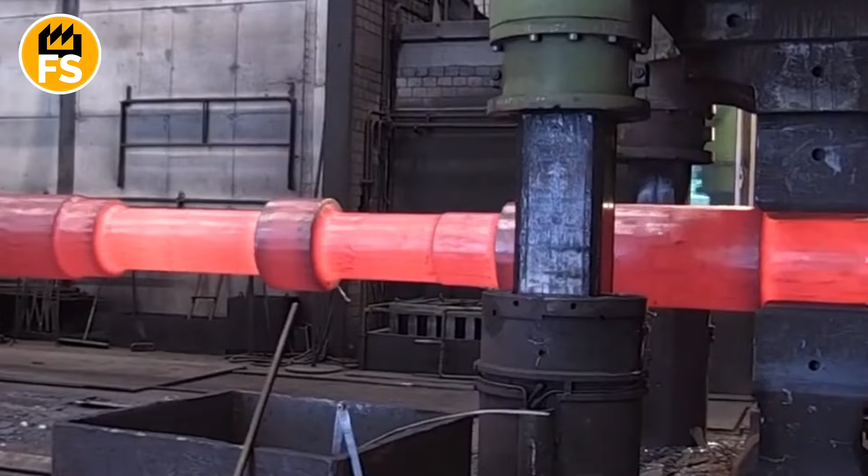Some shafts are made hollow to reduce weight. For this, a perfectly straight hole is drilled through its entire length. After final grinding, the surface of the shaft becomes as smooth as a mirror.

Now that the spine is ready, it's time to create its heart, the propeller. This is a completely different story. A propeller has an extremely complex, aero or hydrodynamic shape that cannot be forged.

Therefore, it is born from liquid fire, by casting. The main material for marine propellers is not steel, but a special bronze. It is slightly less strong, but it is not afraid of corrosion in salty seawater.

First, engineers create a perfect computer model of the propeller. Then, based on this model, an exact full-scale copy is carved from wood or foam. This model is a true work of art. Next, this giant model, which can be as tall as a 3-story building, is buried in a huge pit filled with special molding sand. The sand is carefully compacted around the model, creating a perfect impression of its shape.

Then the mold is disassembled. The model is removed, and we are left with a cavity inside the sand that exactly repeats the shape of the future propeller. This is our casting mold. Meanwhile, in a giant induction furnace, tons of bronze are being melted. It turns into a liquid, dazzling gold, boiling at a temperature of 1,800 degrees. A huge ladle brings this river of molten sun to our mold.

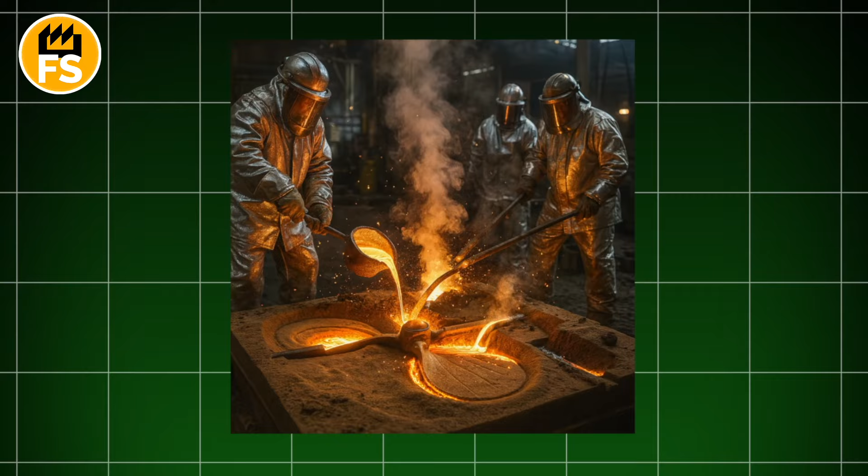And the foundry workers, dressed in silvery fire-resistant suits, slowly and carefully, through special channels, begin to pour the metal into the sand mold. This is a tense and dangerous moment. The metal must fill every smallest curve of the mold, leaving no air bubbles. After pouring, a long cooling process begins, which can last for weeks. When the metal has finally solidified, the moment of birth arrives.

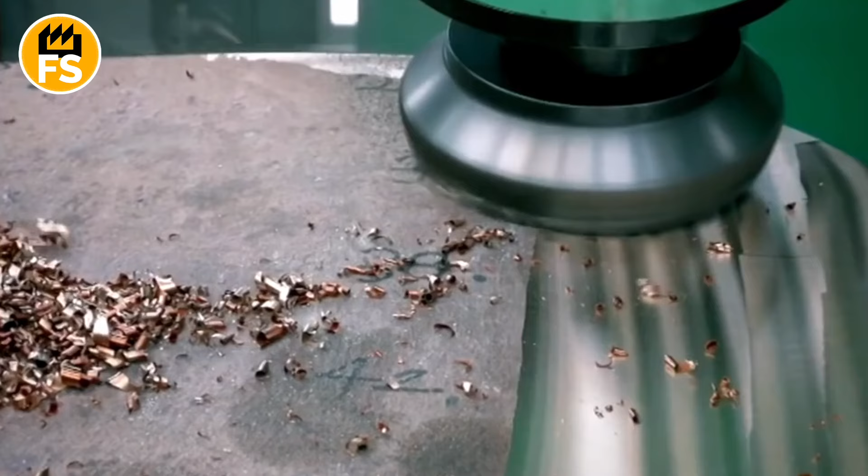With a roar and clouds of dust, the sand mold is broken, and our propeller is revealed to the world. It is still ugly, black with a rough surface. It is sent for processing. First, the remnants of metal from the gating system are cut off, and then it enters the maw of a giant 5-axis milling machine. A huge milling cutter, controlled by a computer, for hours, layer by layer, removes the excess metal from the blades, giving them a perfectly precise, calculated aerohydrodynamic shape.

But even after the machine, the surface is not perfect. It's time for manual labor. A whole team of workers with grinding machines, like an army of ants, for hours polishes each blade, bringing its surface to a mirror shine. Any unevenness on the surface of the propeller creates turbulence, which reduces its efficiency and causes destructive cavitation.

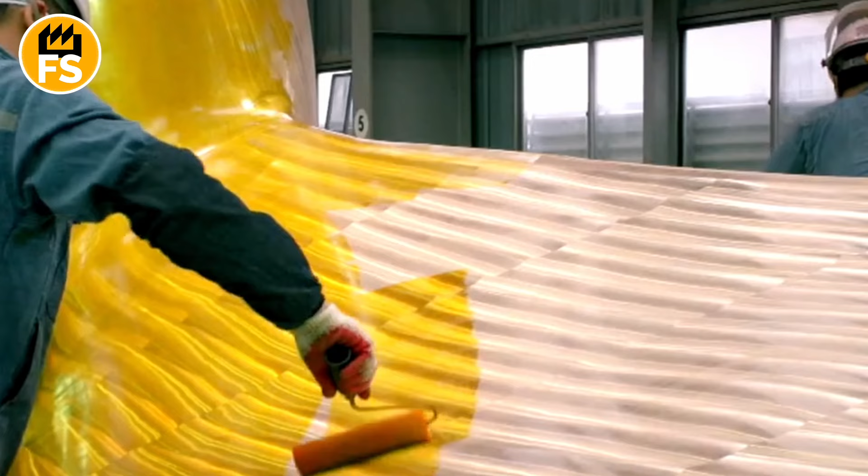And the final, most important test for both the shaft and the propeller is balancing. They are installed on a special stand and spun. Sensors detect the slightest vibration caused by imbalance. If there is even the slightest deviation, literally a few grams on a multi-ton part, it is eliminated by drilling tiny holes or removing a thin layer of metal.

And only when this steel spine and bronze heart are perfectly balanced and fitted to each other are they ready to go to the port to be connected and begin their long service, silently and invisibly rotating in the dark to move giant ships across the oceans or lift airplanes into the sky.

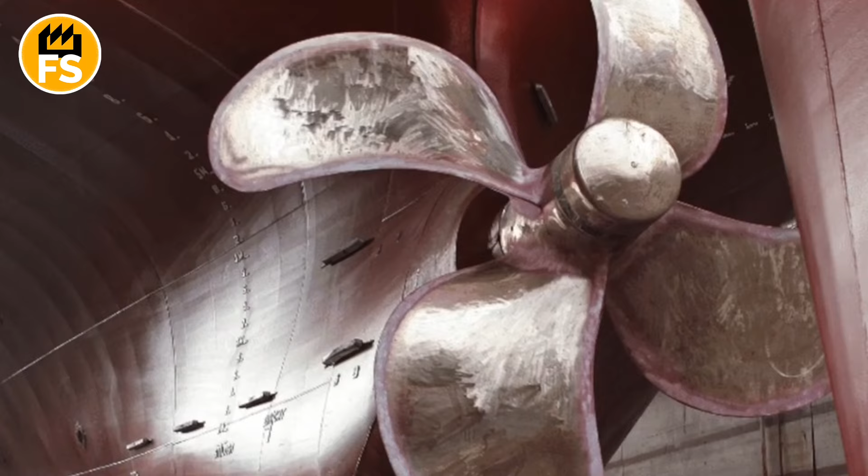The engine of such a container ship can have a power of over 100,000 horsepower. Imagine the power of 1,000 Ferrari sports cars concentrated in one place. And all this colossal energy is transmitted through a single shaft to a single propeller. The torque on this shaft is so huge that if a lever were attached to it, it could easily lift an entire space shuttle.

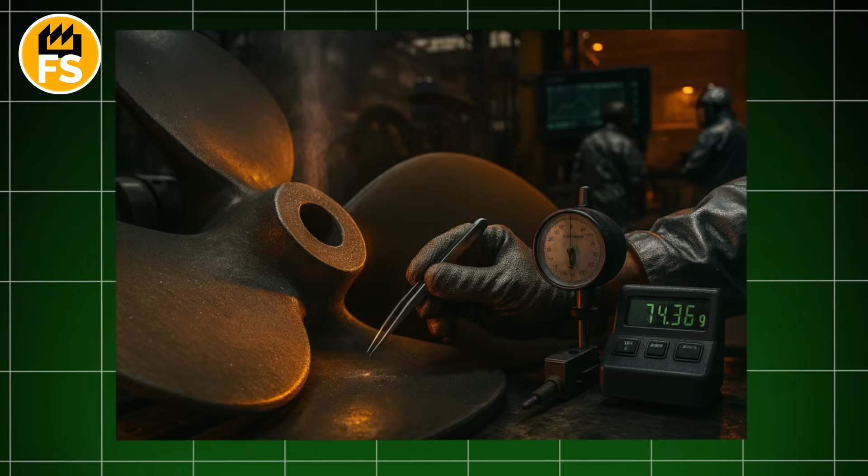After final processing, the runout of the shaft over its entire length should not exceed a few hundredths of a millimeter. This is less than the thickness of a human hair. Imagine a perfectly straight line the length of a basketball court. Well, the real shaft does not deviate from this line by more than this microscopic amount, and the balancing of the propeller is generally a jeweler's work. On a 100-ton propeller, an imbalance of a few tens of grams is considered unacceptable. It's like finding and removing 1 grain of sand from the surface of a car.

The turbine shaft in a modern jet engine, like the General Electric GE90 on a Boeing 777, is not just a rod. Its length is only a few meters, but it transmits incredible power. And the main thing is the speed of rotation. If a marine propeller makes about 100 revolutions per minute, then the high-pressure turbine shaft in a jet engine rotates at a speed of over 10,000 revolutions per minute. At such speeds, the slightest imbalance turns into a destructive force. Therefore, aviation shafts and turbine discs are balanced with an accuracy of fractions of a gram.